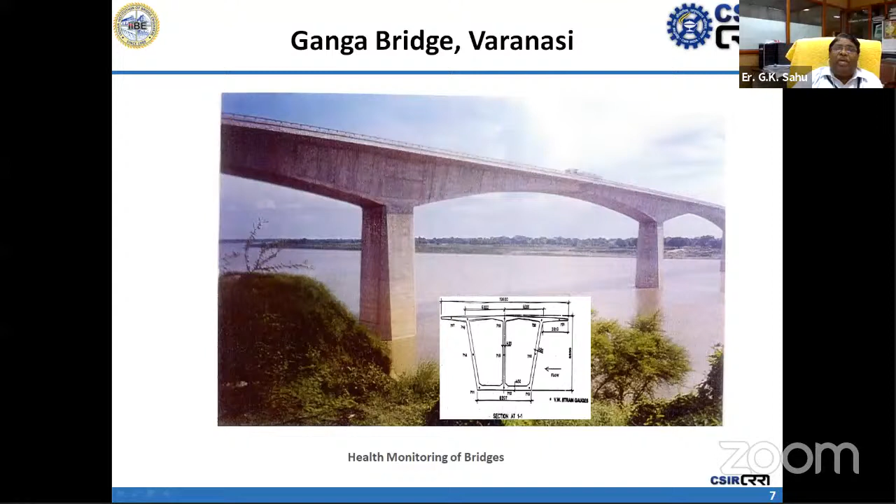Ganga Bridge, Varanasi is a 4-lane bridge, twin cell box girder, cantilever type, 65 meters on both sides. The instrumentation has been done in the well foundation, pier, and both arms of the superstructure—cantilever 65-meter arm, around 27-meter high pier, and 65-meter deep well. Outer diameter of the well is 13.5 meters.

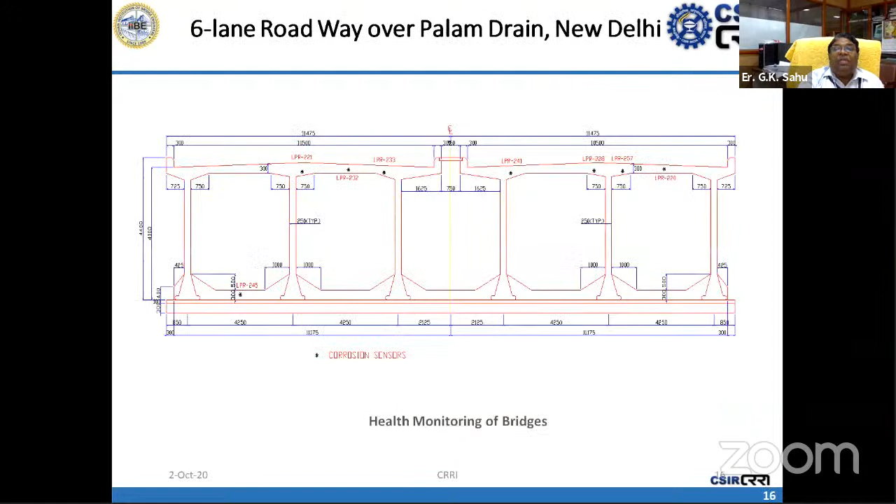Then the Jwari Bridge—instrumentation was done there to see the efficacy of the external pre-stressing work. Then this Palam drain, 6-lane bridge, was also instrumented. Then Signature Bridge, New Delhi.

Yes, there is instrumentation on Naini Bridge, Allahabad, also instrumented. Then Chambal, Kota Bridge across the Chambal—there is also instrumentation work like that.

And these are the new bridges which will be instrumented within a year's time—that work will start. Actually, the Signature Bridge between Okha and Beyt Dwarka in Gujarat—all are cable-stayed bridges.

And this MG Setu bridge—there is a new bridge coming in Patna, parallel to that MG Setu, across the Ganga. Then at Allahabad, the Phaphamau bridge. Then in the Jharkhand-Bihar border, the Sahibganj to Manihari link, there is a Ganga crossing there—so that will be instrumented.

So within a year, you will find that these bridges will be instrumented. It will take 3 to 4 years due to construction activities. But a good initiative has been taken by the National Highway Authority of India and the Ministry of Road Transport and Highways—they are going to instrument all the big bridges.

They have put these 4 at present, but later on they are going to put all the major bridges. Some good views of our bridges in India. Earlier we were thinking we are not having good bridges in India, but now you can see many bridges. Bandra-Worli Sea Link, Vidyasagar Setu Hooghly, Atal Setu, Jammu and Kashmir. So all these bridges we are having.

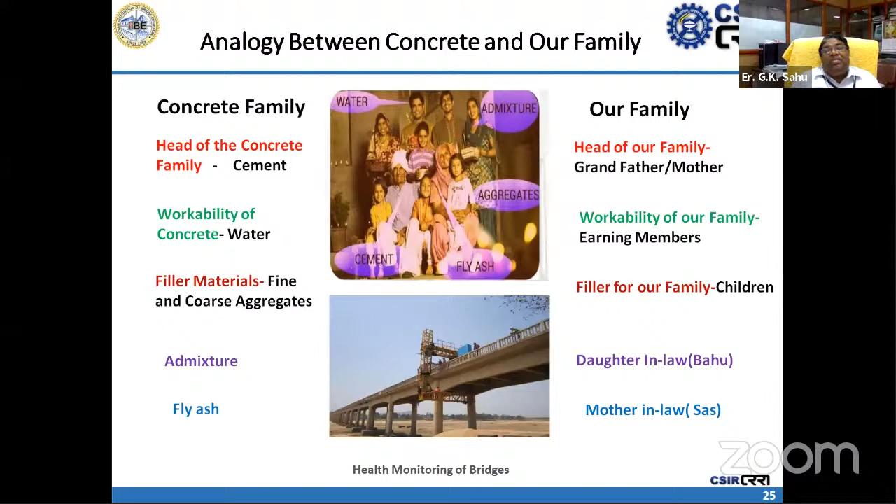Reinforcement you can compare with bones, and in pre-stress structure you are having the same thing what our bone is doing for our structure, just maintaining our shape. Same thing in case of pre-stressing, this reinforcement is doing. So you can find very much similarity.

Even structure number, you can compare with the name of a person, a unique name. Design and drawings, yes, as in our body, you can compare RNA, DNA. That is the design and drawing.

So I will request all the engineers connected with this webinar, please keep all the design and drawing preserved. Make soft copies, dump into the computer, and really preserve this, because our future generation will use it whenever they want for repair or rehabilitation. For the last 30 or 40 years back, we are not having any record, and that is creating too much problem while we are going for rehabilitation work.

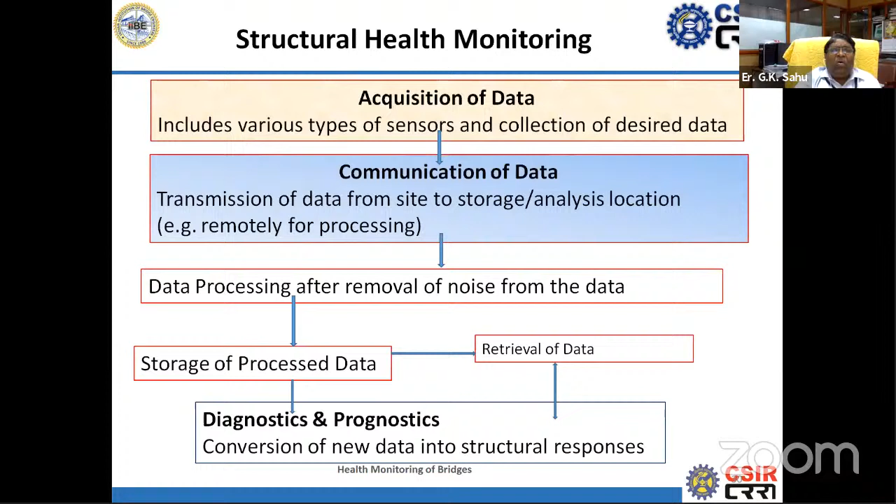And these are the six principles which one should remember for any project. GM1, good management: there should be a very good manager to manage the project. Good materials: whatever materials we are using, that should be the perfect one. Good mix design: whenever you are changing your source material, anything - sand, coarse aggregate, cement, any steel - anything you are going to change, then you have to see your mix design also.

Good manpower: in every stage we require it, whether it is the RMC plant, the construction site, the design side, or the client side. Good manufacturing technique to expedite the work: we have to use the latest technique and whatever the advantages. Sometimes we have to see some techniques which will give us less time and less construction cost.

GM6 is good maintenance. This is very important, the sixth one, which we civil engineers are neglecting. We think that once a structure is constructed, it will last 100 years without any maintenance. That guarantee we are taking, but it is really very bad. If you are not going for GM6, your structure will collapse within 20 to 30 years, not 100 years. So that we should really consider.

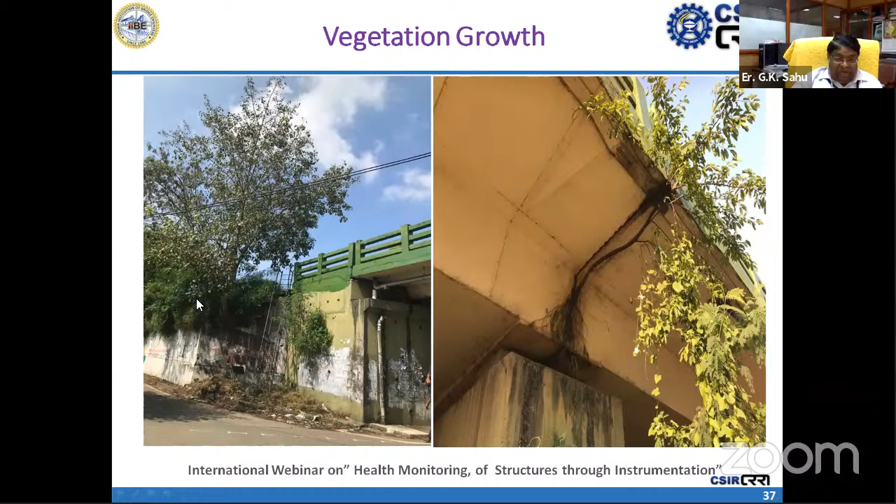You can see here, we don't bother. Once we construct this structure, then we don't want to try anything to clear or maintain these structures. So you will find after some time this retaining wall will collapse. Very small thing, drainage spouts are missing, and it leads to this type of cracks. Not only at the pier head, you find it here also. So these things we should avoid.

Drainage spout. Waterproofing of structure is a must. I will say there should be no interaction of water and structure. That is the main thing. If you want your structure to last 100 years, there should be no interaction between water and structure. So you have to apply whatever is required. This is shown like this.

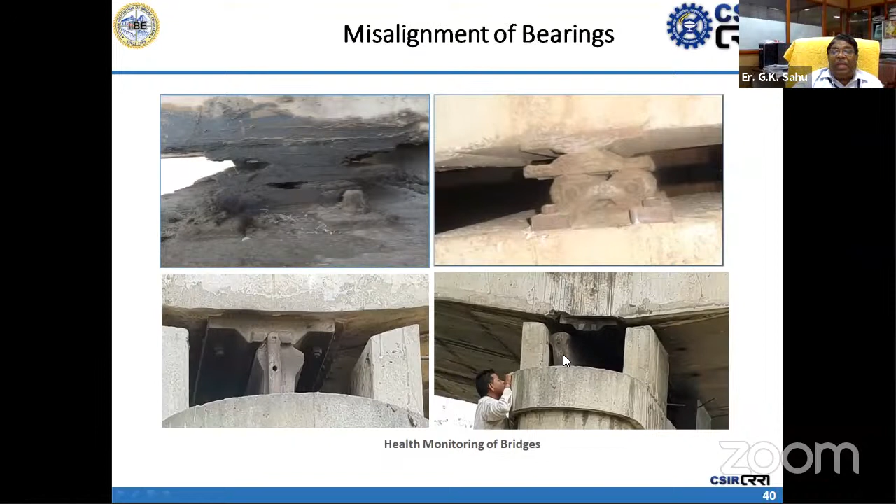You see our maintenance, how we are maintaining our bearings. We don't bother at this stage also. The next year it will be like that. So if this is the case, how can we expect our structure will work? You see here, it is fully cracked, that bearing pedestal, but nobody bothers. Nobody wants to go downstairs and see that also. You see what is the effect of this?

Then you have to replace it. There is no other option, and this is a very big operation, just like our knee joint. That's why I am comparing this bearing with the knee joint. You see, with that manpower, there is failure within 1 to 2 years.

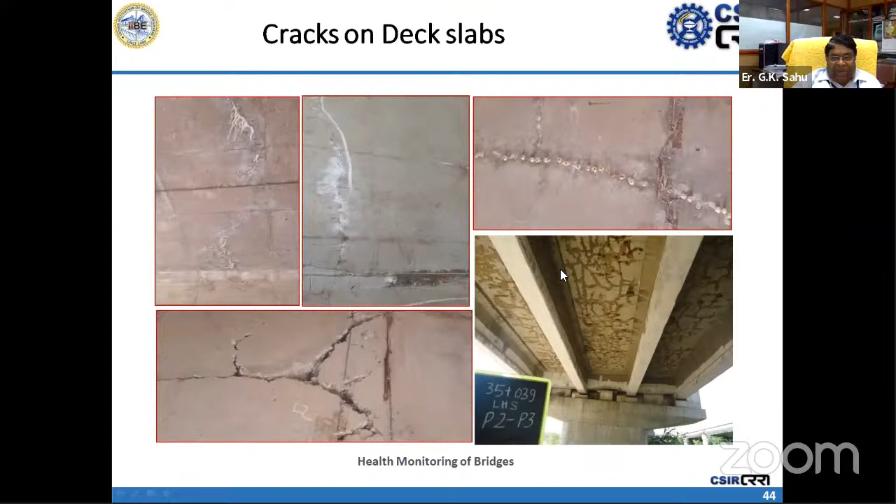When we are neglecting compaction and curing during construction, the material won't be proper, and you will find this type of problem. Then you have to do very big repairing work. So it is better that during construction you take care.

For inspection you need a mobile bridge inspection unit. That is a big one, but very essential, so that we can see everything below the structure. Yes, there is drone technique, but that is in developing stage. We will definitely use it later on in a bigger way. But at present, at least every state should have this, at least 5 to 6 units.

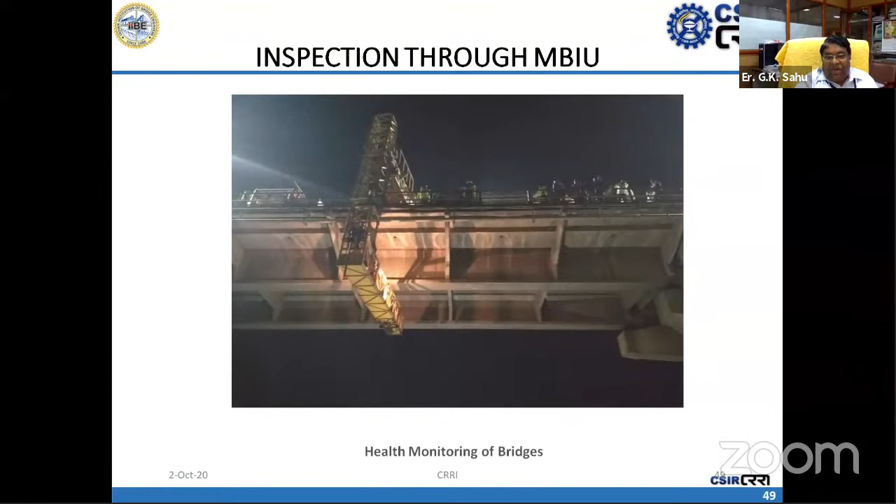Then there should be a walkway actually. If you are not having a mobile bridge inspection unit, we should insist on a walkway, because this is a very good way to inspect any bridge. You can see inspection through mobile bridge inspection. You can go to any part, girder, bearings, and you can see. Also at night, because if you are monitoring in a city area, we have to monitor from 10 p.m. to 6 a.m. So that is the time. Throughout the country, if you are doing this, you have to be ready for night work also in case it's needed.

Sometimes in situ construction is very difficult and time consuming, so you can go for composite construction.

This pier cap, you can see in one go we are casting around 10 to 12 meters. This height is around 25 meters, and in only two lifts we are casting. Then segment construction, this is essential actually, and you can see this type of work.

You can see this design. Design people have to take care of handling stresses. Sometimes I am finding in several bridges there is so much cracking during erection, because people are designing for the design load but not for the erection load. So this should be taken care of by the designer.

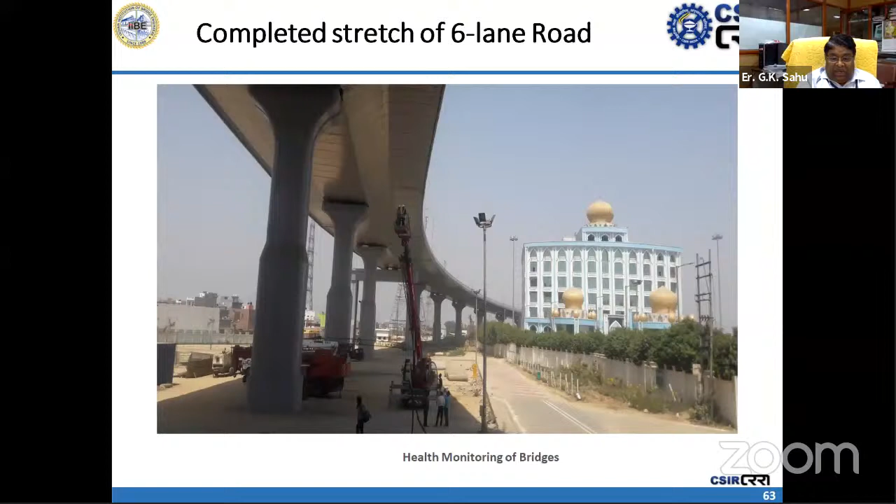Sometimes we are lifting the whole girder, sometimes just lifting one segment of the superstructure, but sometimes we are lifting the whole superstructure, the whole girder at a time. So that lifting stress should be taken care of during design.

We all know these techniques, the segmental technique. If you are not careful during construction and maintenance, then you have to go for external pre-stressing. You will see afterwards how many.

If you are not monitoring, someday this bridge will collapse definitely. This is not a one day work. Actually, if you see, it will start like this, and if you don't care for 3-4 years, it will go like this. So proper inspection and monitoring is essential.

You can avoid this collapse of bridges by putting some sensors, by knowing the health status of the structure. You see, this is only due to negligence. We are not inspecting the bridges, not monitoring the bridges. You can see so many collapses.

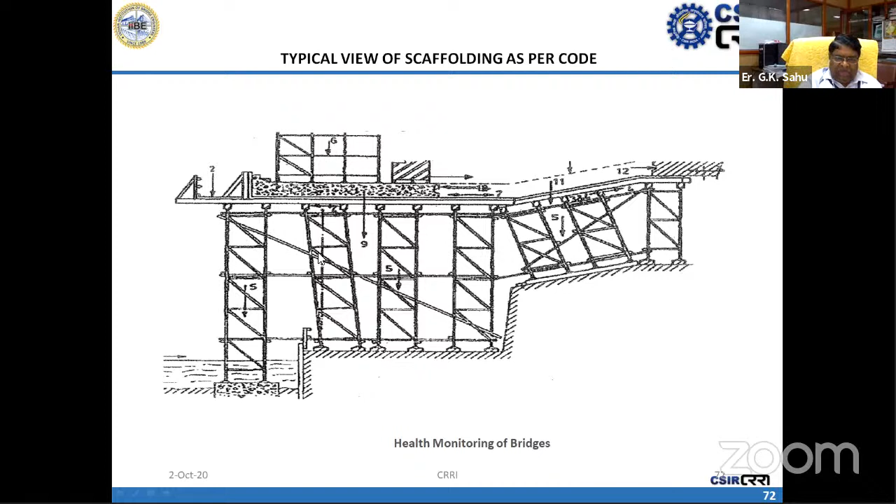Simple thing, this scaffolding work, we have to provide some diagonal members also. Generally in scaffolding you will find horizontal and vertical members, but diagonal is also essential, and sometimes it is getting collapsed during construction. So to avoid all these types of things, we have to monitor the health status of structures.

These are the 8 parameters which we can monitor very easily: stress, temperature, deflection, lateral pressure, tilt, crack width, corrosion, and acceleration. By monitoring these parameters, you can comment about the health status of structures.

These parameters are common to all structures. You can monitor a bridge, you can monitor a building, you can monitor a nuclear power structure, you can monitor a dam. So if we are talking today about bridges, it will be applicable to all structures.

But for choosing any type of sensor, we have to see all these 4 parameters. Suitability for embedding: some sensors should be embedded because exposed sensors are sometimes difficult to protect. So it is better once you put them during concreting, then it is preserved. Just like in a locker you keep your ornaments, so a sensor embedded in concrete is like it's gone into the bank locker.

Ruggedness for on-site handling and installation: you have to see how we are going to use it. If you are experimenting in the lab, you will need a different type of sensor. If you are using it at the site, bridge sites or any structure site, you have to use a different type of sensor. Long-term stability: our structure is for 100 years, so we have to see that it should have very long stability for 100 years.

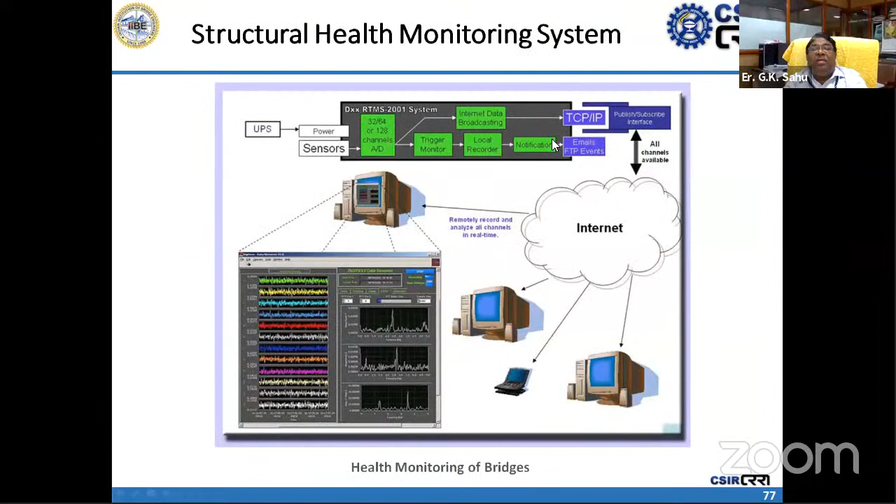To find out temperature across the thickness, you have to put several sensors so that at different depths you can find out the gradient. We did this around 27 years back, in 1993, at the Ganga Bridge, Varanasi. The pier thickness was around 120 centimeters, so we wanted to know the temperature gradient across this thickness. We put sensors there. For any thickness, you can put some sensors and find out what is the temperature gradient.

Then for deflection, you can go for any instrument - simple dumpy level, LVDT, or 3D terrestrial laser scanner - anything you can use, but we have to know the deflection. That is the very predominant parameter.

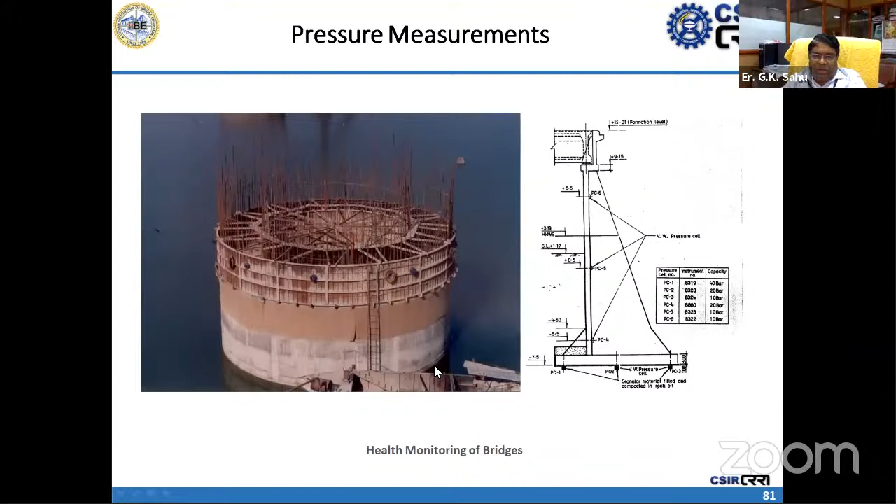Then lateral pressure, we can monitor through earth pressure cells. In case of retaining wall or well foundation, we can monitor these things. We can put the pressure cells at different levels and find out.

These are tilt meters, through which we can find out the tilt. Nowadays, we can automatically monitor by putting some tilt sensors there, and you can monitor remotely.

Inclinometer during construction - if you want to monitor, say, the tilt of the well during sinking operation, you can find out through this inclinometer sensor. You just have to insert this sensor in this case.

If you want to monitor cracks, you can go for manual monitoring with a microscope, or you can put some crack gauges and monitor automatically.

This is a corrosion sensor during construction. You can put some corrosion sensor and find out the rate of corrosion. Rate of corrosion means change in effective diameter per year. You can find out the unit, which is change in effective diameter of the bar per year, because it's a very slow phenomenon.

You can monitor anything with the help of our mobile bridge inspection unit. You can go to any part, take samples, and check. So that is there.

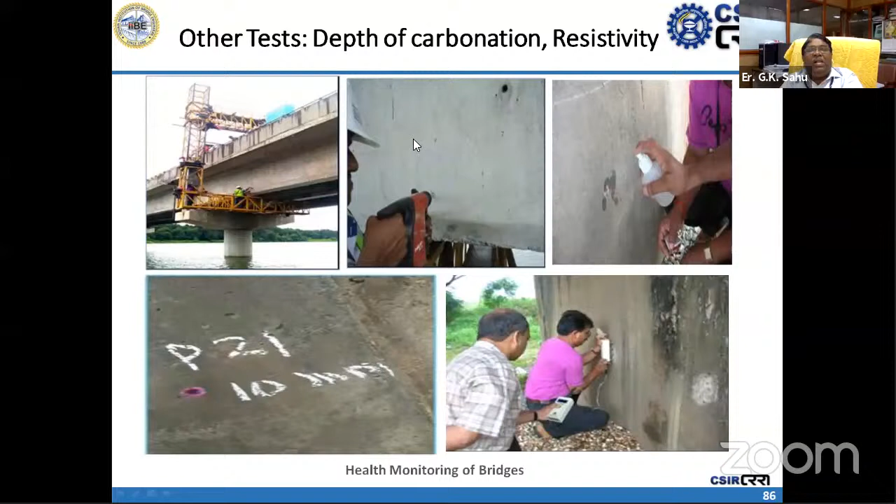In case of accelerometers, you will find so many types. We started with this much size, and now we are using this type of very small sensor. Earlier, this was a uniaxial accelerometer, and nowadays you can find this much size only for triaxial sensors.

If you want to monitor pre-stressing force, you can go for load cells. This can be put between the end bearing plate and anchor plate, and we can see at any time what is the pre-stressing force. So for instrumentation of a bridge, you have to choose some instrumentation scheme, and these are the parameters which we can monitor.

In case of well foundation, we can see at different levels. We can monitor these parameters: lateral soil pressure, hoop and longitudinal stress, tilt of well, corrosion. And these are the monitoring stages.

We have to take readings. Before putting any sensors, you have to check whether your sensor is working properly or not - that is the first performance evaluation of sensor. At least 2 to 5% of sensors should be checked, during hardening of concrete, during pre-stressing, after completion of construction, during global responses, during peak summer, peak winter, effect of live load, and long-term. These are the stages.

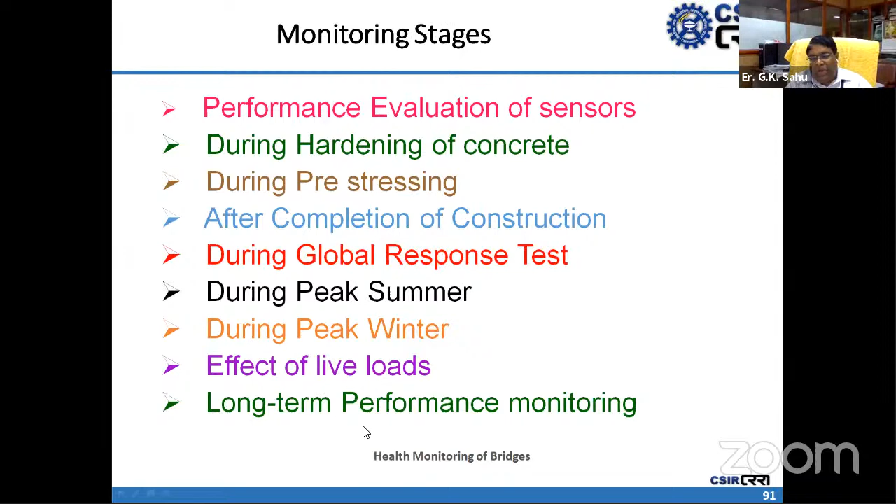You can check your sensor by putting a strain gauge here and applying manual strain, just rotating this arm and putting this movement. The displacement we will find out, so delta L by L will give the applied strain.

You can compare by seeing your output of the sensor. You can also put some strain gauges inside cylinders and find out what is the strain output of that gauge versus the surface strain, or use a strain control machine directly.

Temperature is very easy - you have to put it in a temperature bath with some standard temperature sensor, and you can compare. For pressure cells also, we have to put that pressure cell inside a chamber and keep changing the pressure of the fluid, and you can compare.

So these are the very minor tests that are required before putting any sensor on the structure, so that we can get that confidence whether my sensor is working properly or not, and how much is this confidence level.

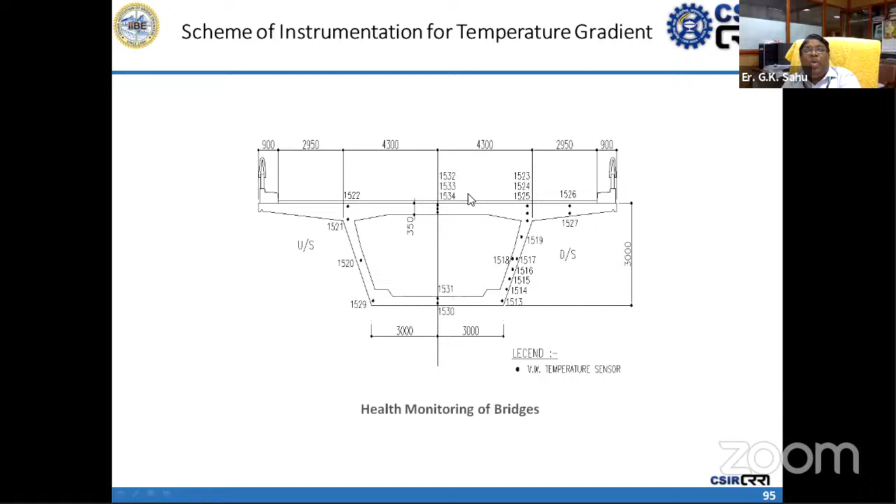For temperature monitoring, just for a box girder construction, I have shown so many sensors you can put, and you can monitor any temperature gradient in any components - in slab, web, or deck slab, or junction, anywhere. This is the deck slab temperature graph during summer. We have put some sensors in the deck slab at different depths, and this is the daily variation of how temperature varies at the deck slab.

This is how the strain varies due to diurnal temperature variation in peak summer. So this is the variation - you can see how if something happens, this behavior changes. Same sensor 14, 17 - these are sensors at the junction of the web and deck.

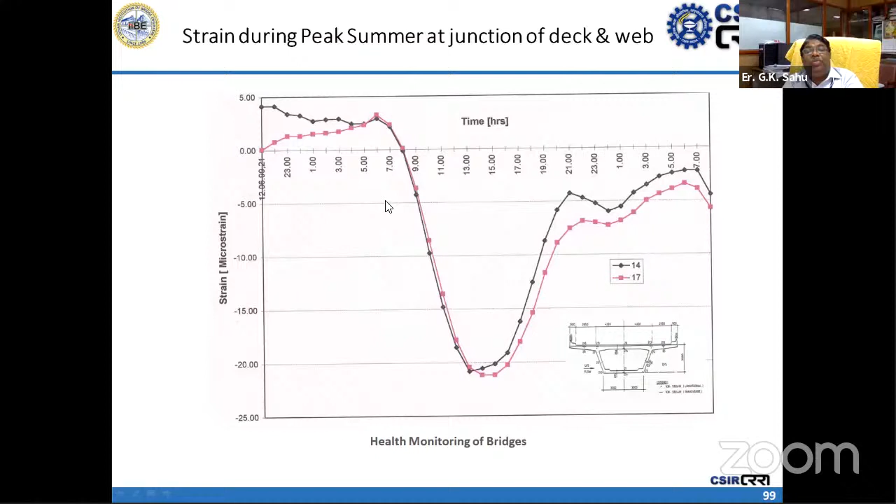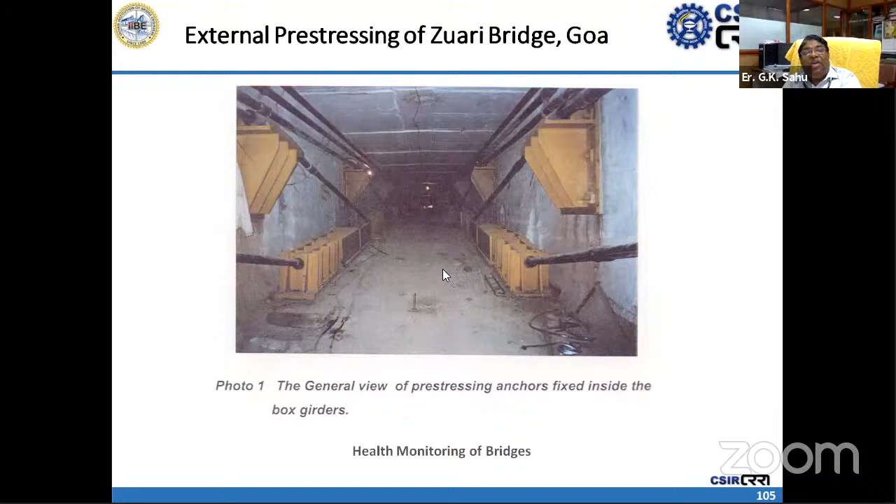We have monitored strain as well as deflection, and for deflection you will find only that net effect is 5 to 7 millimeter. So we can't expect a very big deformation change due to external pre-stressing - only that stress level will change, but deformation you can't see much.

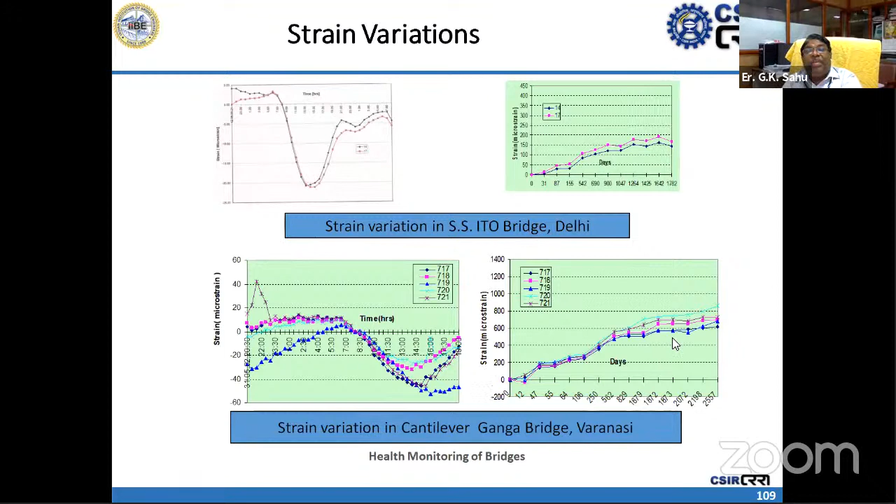If you can't put any sensor, let us take one deflection measurement at the middle point, or for simply supported or cantilever at the end, and record the minimum elevation and the maximum elevation over 2-3 years. Then give the upper limit and lower limit for that bridge, take one set of measurement, and see after 20 years whether that level is same or different. If it is within that limit, there is no degradation in the structure.

Degradation will only come when you allow water, air, carbon dioxide, etc. to enter. You have to prevent these things, so you can keep your structure well.

For strain variation also we have to see what is the minimum and maximum, and that reading should come within that limit. Say if one gauge out of 100 is working, then also you can comment, because at the beginning you have that record of what is the minimum and maximum variation of a particular gauge. In any year you can find out this variation, having all the effect of whatever seasonal variation, the daily variation, considering all those things this has been put.

So taking any one set of measurement, you can comment about the health status of the structure. So that is the beauty.

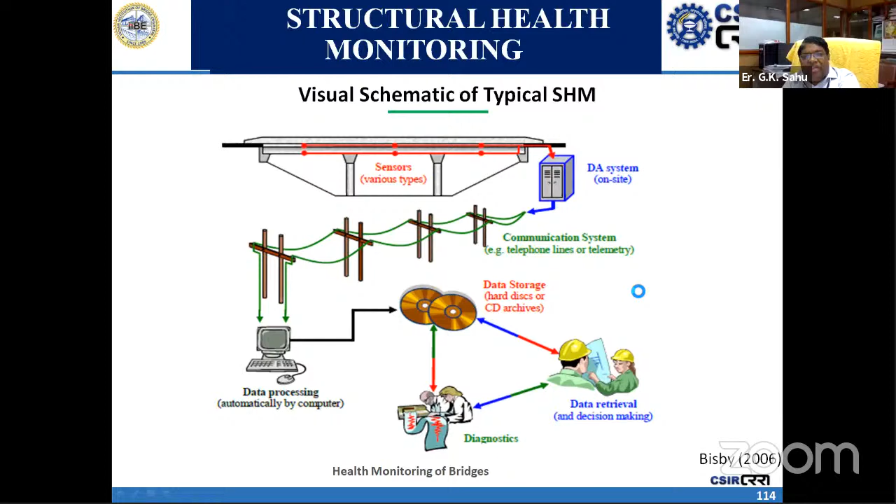I will request all of you, all the bridge authorities, to kindly put some sensors in the bridges, so that later on we can say something about the health status of the structure.

As far as CRRI is concerned, we have that mobile bridge inspection unit. We are having bearing test facilities, so we can monitor condition assessment of any structure, say bridge, flyover, anything. Then you can go for the quality assurance also. So these are our activities which we are monitoring there.

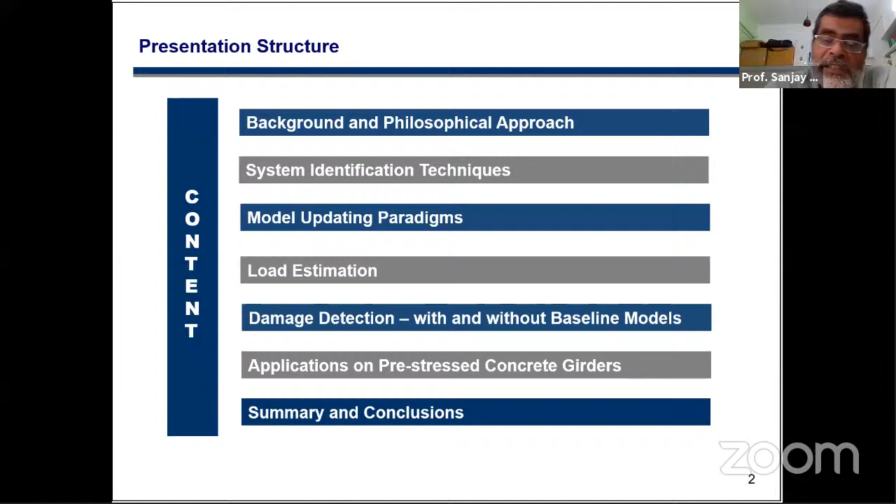So there are several important bridges in the railway infrastructure, most of which are over 50 years old, and several are more than a century old, but they're still running.

And not only are they running, but the loads being run on them right now are tremendously more than what they were designed for at the time, both in the frequency of trains and individual axle loads. Railway had gone from CC to CC plus 6, to CC plus 8, to CC plus 8 plus 2, and now they're talking about 25 tons and HML. And the axle load has gone up from 20 tons to 32 tons, which is huge.

If you're looking at a bridge which was designed for a 20-ton axle load, and now we are saying we are running 32-ton trains on it, that's a massive, massive change.

And the bridges in Indian Railway typically perform well because a lot of the older bridges were made with a very, very conservative approach of design. I think that's one thing we take back from all our assessment of bridges: having conservative design approaches, while maybe uneconomical in the short run, ends up giving you structures which last a long time, because your load patterns change, your requirements from them change, and having a conservative approach gives you a certain way of dealing with change over a period of time.

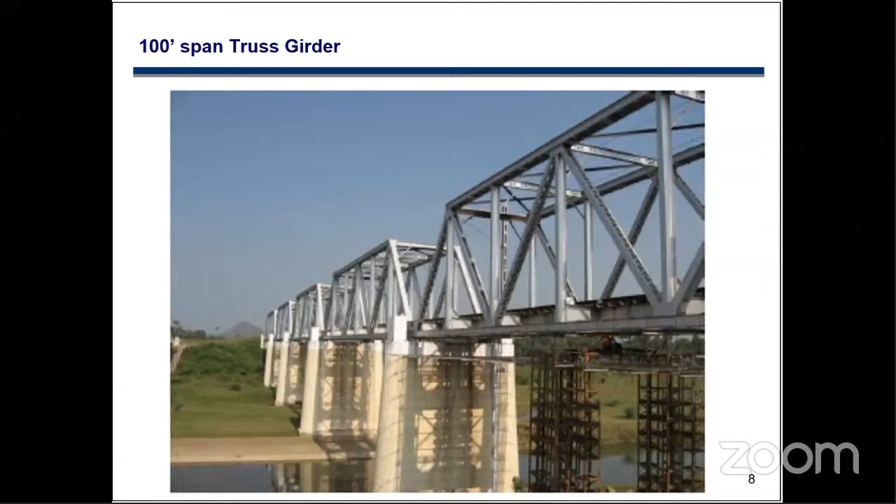So this is one of the first bridges that we had taken up. It's a 100-foot span truss girder. Railways follows a very nice principle of having a single design which is replicated through several bridges. So this 100-foot span girder was a typical RDSO design, which we had come across in at least about 4 or 5 different types of bridges at different places, where the design was the same, which also helped us try to figure out whether the same designs behave in the same way in different places.

So we came up with an instrumentation scheme. It's a fairly straightforward instrumentation scheme where most of the critical truss members we monitored. The upstream girder we monitored using both top and bottom strain gauges so that you could get an averaging of that as the axial strain and the difference in that as the bending strain. And the other girder we monitored with only axial strain gauges.

This is also one thing, because instrumentation is an expensive process and there has to be a certain optimization of instrumentation which needs to be done. We also had displacement gauges, we had accelerometers, we had thermocouples to measure the temperature, we had tilt meters. So we had done the whole thing.

So as far as strain gauges were concerned, we had got the 5mm strain gauges for steel, the longer 120mm strain gauges for concrete, which we use for measuring both concrete and masonry. So that was the kind of instrumentation scheme that we had actually done.

We had got the LVDTs to measure the displacements, and we had placed LVDTs at the center of the span, and we had placed LVDTs on the roller side to try and get an inference on what is the fixity at the roller bearing or whether it is completely free.

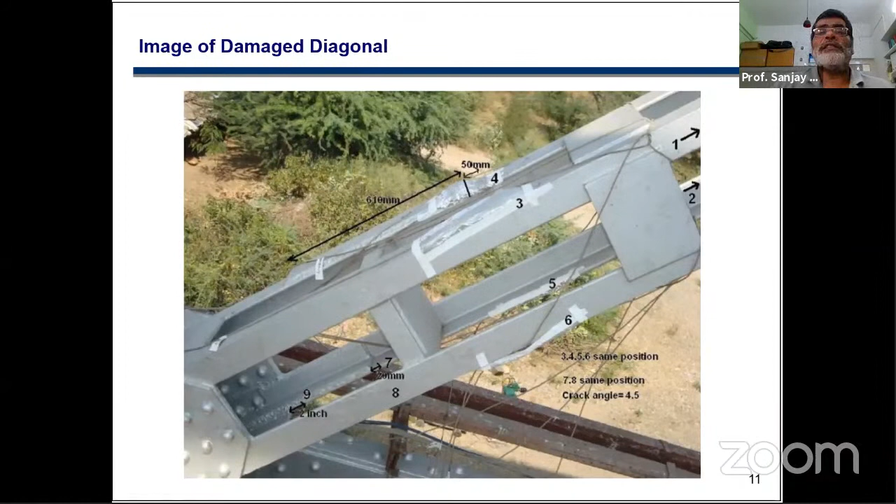Another bridge that we had managed was a 150-foot span damaged truss girder, where there was a diagonal which was damaged. In addition to the instrumentation scheme that we had done for the 100-foot truss girder, we had also done a far more detailed and intensive instrumentation using strain gauges alone for the damaged portion, where we tried to look at the damaged portion and have several gauges which give you a pattern of strain around the damaged portion.

We had a similar instrumentation scheme for this. Then we had done a masonry arch, which was a beautiful structure. It is, I think, a 140-year-old masonry arch, which is in Jharkhand. We had monitored this with an instrumentation scheme of strains and displacements. And we had done some kind of rail level monitoring to figure out what is the dynamic impact coming on the structure and what are the longitudinal forces being transferred. Those are the other parameters that we're trying to monitor.

System identification techniques, we had several standard methods which we had used. One thing we found out is that global frequencies are insensitive to damage, which is essentially a local phenomena. And although the global frequencies are the easiest to measure, they don't change much, whether we looked at a damaged girder or an undamaged girder. We had done this in the lab also, where we had created a structure where we had physically introduced damage. And we had seen that the global frequencies don't change much.

Putting a local damage does not really change the global frequencies much. And that is very interesting, because somewhere along the entire thing, there was this expectation that vibration-based monitoring would show shifts in global frequencies which would tell you what the damage is. And now this is very interesting.

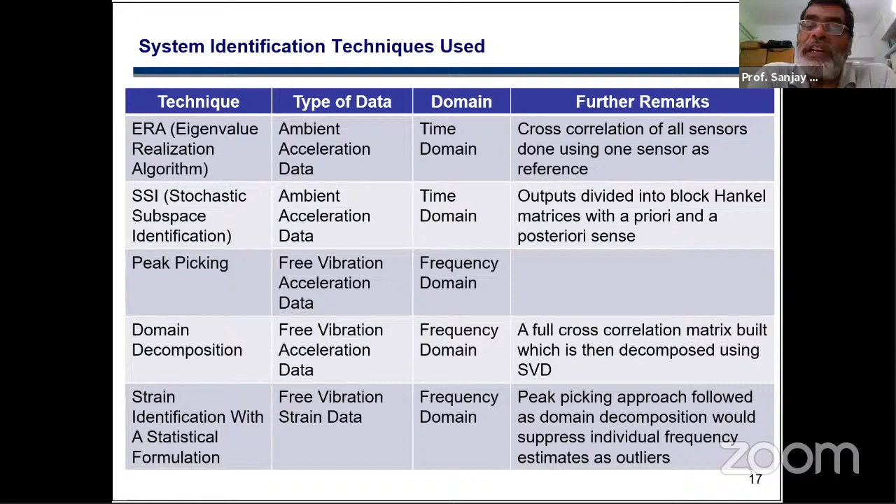Also, we did several system identification techniques: eigenvalue realization, stochastic subspace, peak picking, frequency domain decomposition, and a strain identification with a statistical formulation. These involve different types of data, whether ambient acceleration, free vibration, or strain data, and different domains - some are frequency domain techniques, some are time domain techniques. We did all of that put together.

So then we ended up doing a local thing, where we tried to figure out what were the strain decompositions from the local data, and from there we picked up different kinds of things. Then you look at where does it occur - does it occur in both girders? Does it occur in only one girder? Does it occur in one and not the other? Those kinds of patterns, along with the data, ended up giving you a damage indication.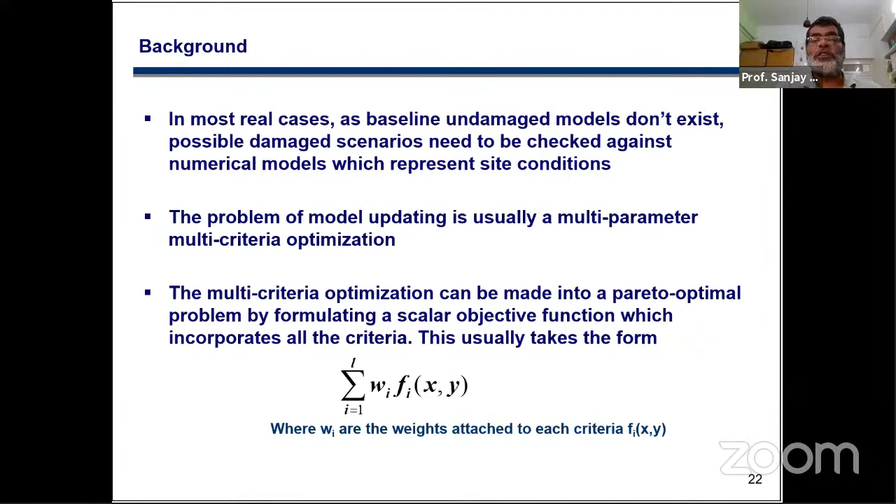Model detection, in most real cases, as baseline undamaged models don't exist. Damaged scenarios need to be checked against numerical models, and then you end up getting some kind of a multi-criteria optimization. This is a kind of weighted formula for trying to figure out what is a scalar objective function that incorporates all the criteria together. Because we can incorporate all the criteria together, it changes the multi-parameter, multi-criteria optimization into something in which a Pareto optimal solution can be generated.

Issues with the classical techniques is that most optimization techniques work with local minima, which is a black box. We have just talked about this. I'm just repeating a lot in this particular slide.

So the approach that we came up with was that we did a two-pass system. First we did a pass to check the data for consistency, and we had a numerical model which is at least qualitatively representing field data. It might not represent it quantitatively, but it has to qualitatively represent field data for the numerical model to be used for doing any kind of optimization.

The multi-criteria are generally taken to be the squared errors, to formulate a modified least square approach. Based upon the degree to which a numerical model represents the field, we generated shape norms, and these shape norms, along with the weights, generated what was a Pareto optimal single criteria approach.

Then we did a data pass algorithm, where multiple runs are recorded, consistency checks are performed to identify shape and peak correlations. From the various data sets, the best correlated ones are identified for use in model updating exercises.

So the model pass algorithm is that you take an n-dimensional solution space and a start point is taken. Then you do a sensitivity analysis based upon varying parameters. Based upon the level of sensitivity, we picked the two most sensitive parameters and varied them till we got one solution. Then we picked one parameter out and took that with the next parameter, and again did a two-pass system.

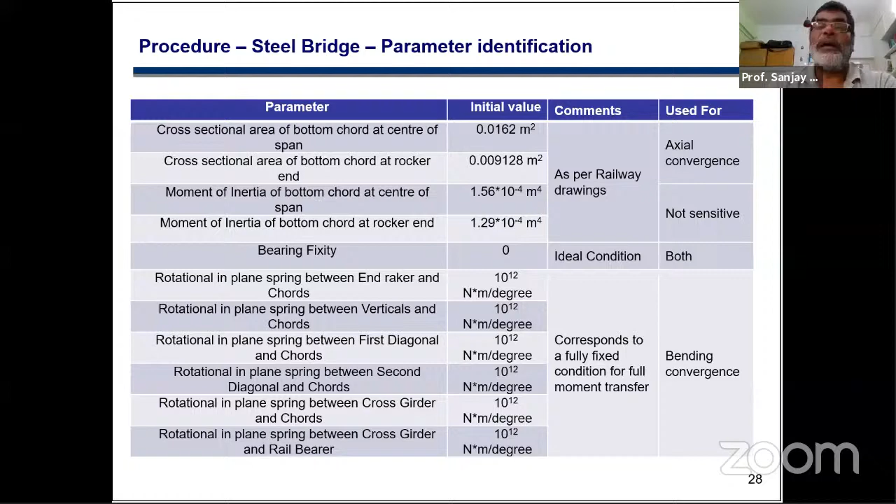This indicates that your bridge is actually in quite a good condition, because there isn't much change really that you're getting if you're looking at it from this kind of perspective. This gives us a way of looking at a bridge which shows that the condition of the bridge is okay.

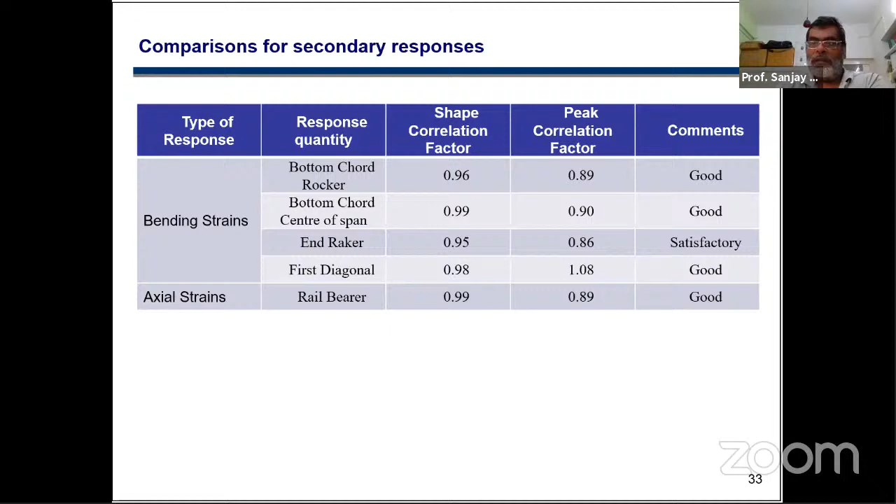Masonry arch, we followed the same approach. You took these as your parameter choices and ranges, and you ended up getting correlation factors of this form between the different responses and your numerical responses, between your site recorded data and numerical responses.

You did your sensitivity analysis, and ended up getting final values starting at your relative minima. You ended up getting an error norm of 0.07, which is a 7% error norm between your site data and your numerical model, and you got a certain value of your parameters.

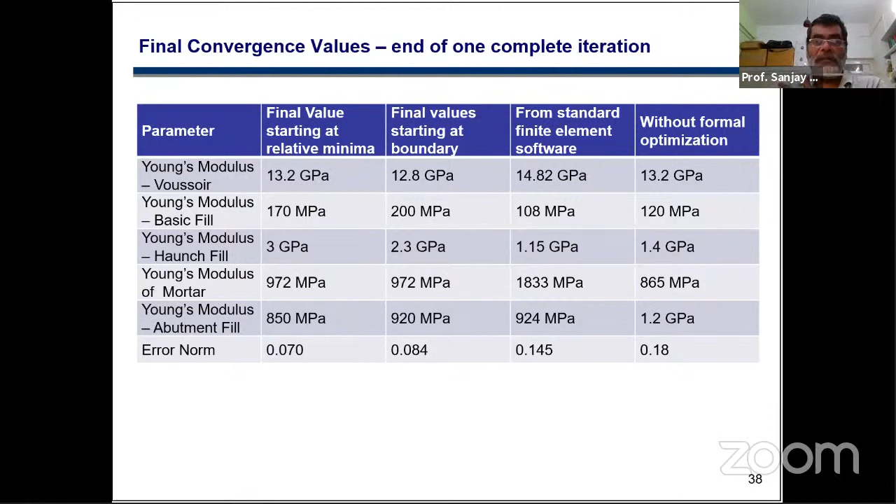The values of these parameters corresponded again to a system which indicates a sound kind of way of existence. And therefore, this assessment showed that your masonry arch was in a very good condition.

In summary, the proposed methods give excellent convergence results for a variety of structures. When problems can be partitioned, they reduce complexity. The approach is seen to outperform the standard solution, and the modeling ideology of the masonry arch coupled with the model updating algorithm enables convergence with strain measurements, which is unique.

So that was the entire model updating paradigm that we are looking at. Now, this is the way that we have actually approached condition assessment. And I think I've reached about the half an hour limit of this talk, so I'm going to stop now and ask whether there are any questions. There's more work that we have done, but I just wanted to give a flavor of the kind of work we have done.

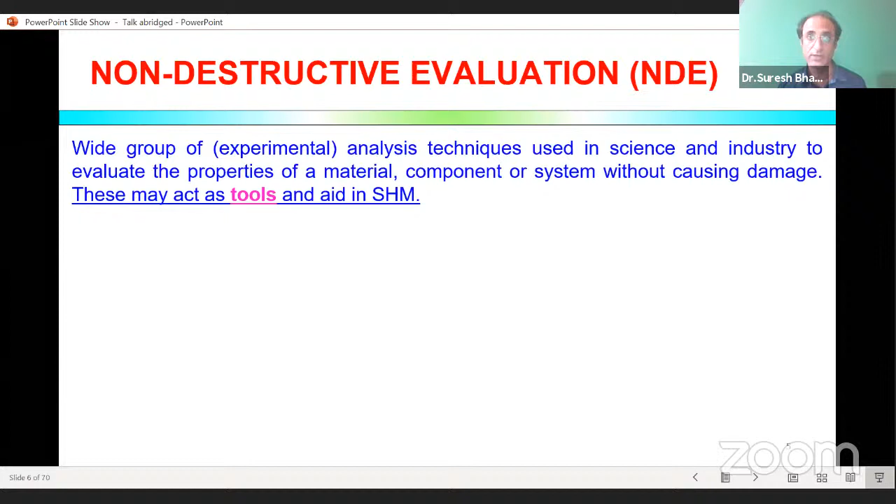We must distinguish the term structural health monitoring from non-destructive evaluation. Non-destructive evaluation is basically a set of techniques which enable measurement of some physical property of a material without actually causing any damage. So NDE techniques themselves are not structural health monitoring unless we use them for SHM in a certain framework such that we get continuous monitoring data of the structure. Then we say that this non-destructive evaluation technique is contributing to structural health monitoring.

Let's do a quick overview of the current and futuristic technologies and some of the sensors. We can break down structural health monitoring techniques into global and local. Speakers have already covered examples of both. Global dynamic response techniques are there, global static response techniques are there, and in local, if we apply an NDE technique continuously in the framework of SHM, that is also fine. There are also specific local monitoring techniques like the electromechanical impedance technique, or EMI technique. We have to judiciously combine global techniques with local techniques because global parameters generally are not very sensitive to incipient damage.

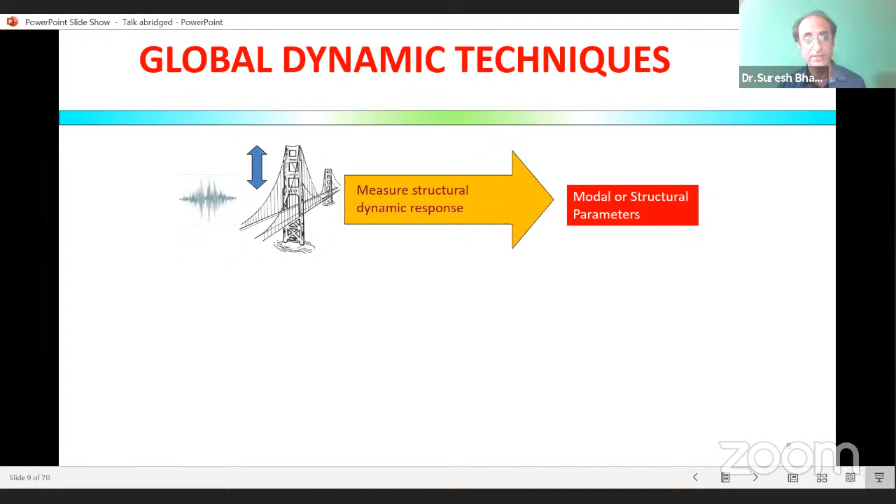As far as global techniques are concerned, we try to obtain modal or structural parameters by carrying out a dynamic test, or we begin with a finite element model, then do a dynamic test and model updating. Both versions exist, but essentially most techniques work in some way and look for parameters like change of stiffness, obtained from the acquired mode shapes and natural frequencies, or the change in flexibility, again from modal data, or change in curvature, which is the second derivative of the displacement. Whichever variation one is using, we are basically getting information about the modal parameters. Out of these methods, the damage index method, which utilizes the modal strain energy, has a definite edge.

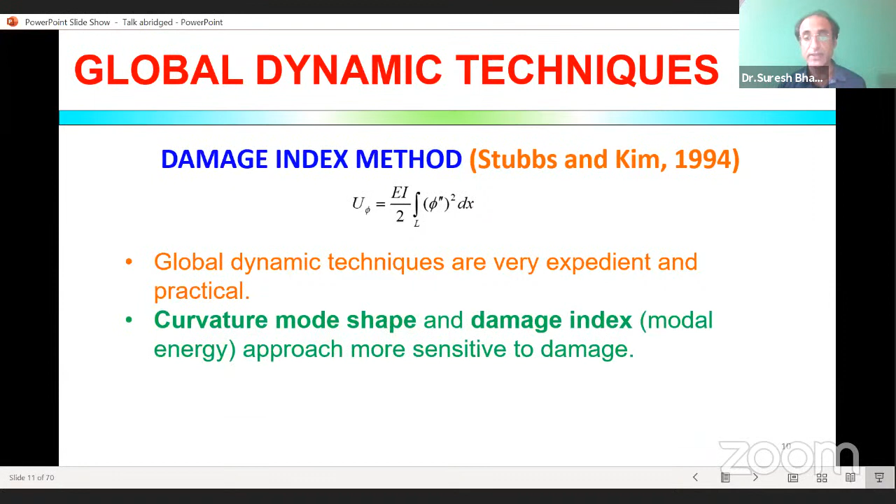So the summary is that global dynamic techniques are expedient and practical. Out of these, the curvature mode shape and the damage index method, which rely on modal energy, have higher sensitivity to damage. But these global techniques, especially the global dynamic techniques, rely on global modes, so they are sensitive to moderate to severe damage, but often miss the incipient damage. We'll see some examples of how this can be captured.

Now, global static techniques, theoretically, are fine, but practically infeasible because they involve applying calculated loads and measuring deflections or strains, which itself is difficult, especially if we have to measure a large number of deflections — that's a troublesome option. However, global static techniques can be used in identifying some operational parameters, like a particular key deflection or key strain at some critical locations. So we can definitely make use of them that way. But capturing damage and its location by standalone measurements could be a bit difficult.

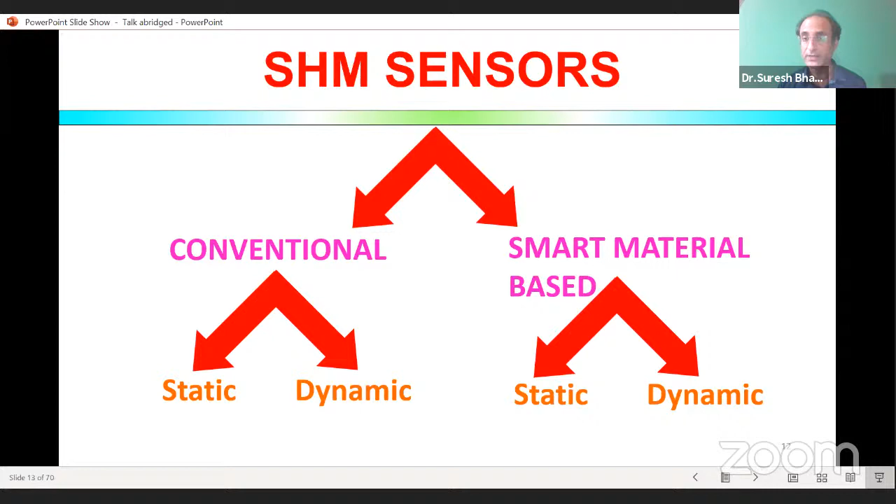When we talk about SHM sensors, we can classify them as conventional and the new-age, smart-material based. Conventional sensors have both static and dynamic types, and smart materials also have both static and dynamic sensors. Conventional sensors include electrical strain gauges and vibrating wire strain gauges. Electrical strain gauges are suitable for lab-based experiments, while vibrating wire strain gauges are suitable for field applications. They are quite versatile for long-term strain measurement in the field.

In the dynamic field, essentially accelerometers are most popular. But accelerometers also face problems of small bandwidth, being very expensive, and being fragile. So smart material based sensors offer new avenues to us. Basically, smart materials are specific materials which possess the property of undergoing a specific physical change when subjected to a stimulus — they display stimulus-response characteristics, and these are utilized to measure particular parameters. We have a number of commercial smart materials like optical fibers, shape memory alloys, ER fluids, and piezo materials.

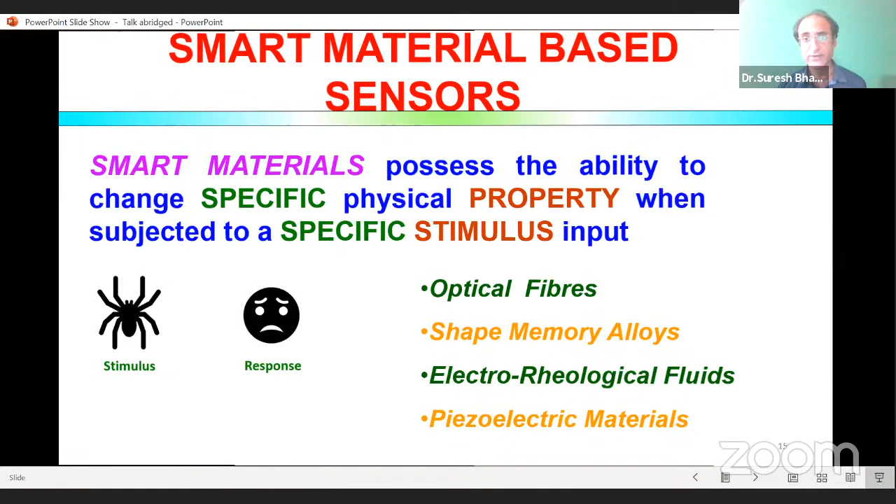So here we'll just briefly discuss optical fibers and piezo materials. Optical fibers now form the backbone of communication systems. They are preferred because they are free from electromagnetic interference as opposed to electrical cabling, and they use the process of total internal reflection for communication.

Now they have also entered the field of sensing in the form of fiber Bragg grating sensors, or FBG, which are quite versatile. Basically FBG is a set of gratings imprinted in a small segment of the fiber, and they can reflect a particular wavelength of light. If we pass a broadband light, majority of the signals are transmitted to the other end, and one particular wavelength called the Bragg wavelength is reflected back. This Bragg wavelength is sensitive to any strain, temperature, or pressure changes. That is the principle used by optical fiber sensors.

They are best for static measurements or low frequency measurements involving health monitoring applications, but they offer multiplexing. That is the leverage of optical fibers, that along a single fiber, n number of sensing units can be imprinted, and they can be monitored by just a single channel data logging system.

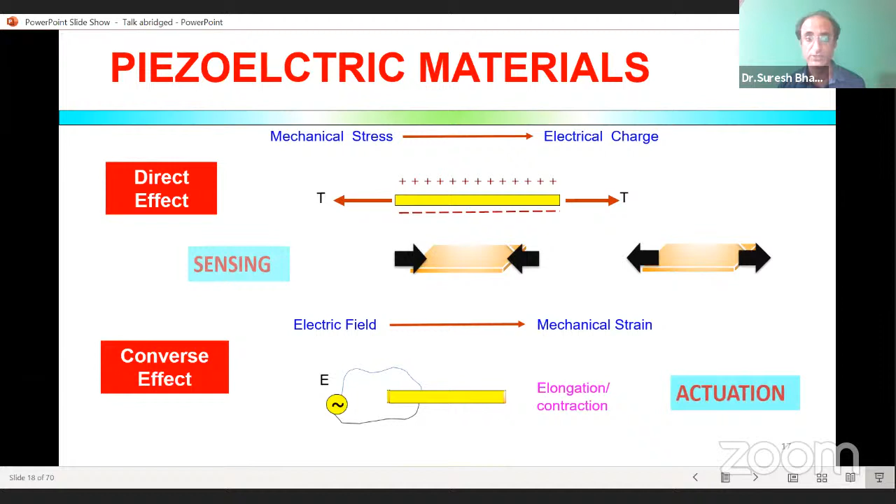I'm just halting up. A plane is flying very low, just a couple of seconds.

Now coming to the applications, we are using piezo materials day to day in our life, in igniters, detonators, accelerometers, tactile sensors, pressure transducers, in mobile phones. It's the piezo elements which convert sound signals into electrical signals. Structural health monitoring, energy harvesting.

So we'll discuss about energy harvesting also. In this configuration, the piezo element also acts like a generator. So it's a single unit generator, no moving part, so that way very compact.

The converse effect is utilized again in mobile phones. Now the converse effect is used for converting electrical pulses into sound in fuel injectors, musical cards, inkjet printers, vibration control, turbo machinery, actuators, precision positioning, and many applications which are numerous.

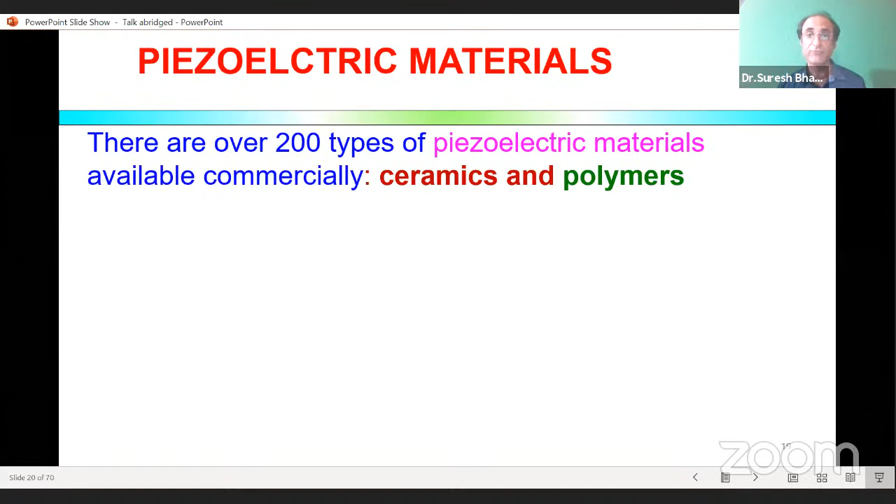Now there are over 200 types of piezo materials, and in the case of structural health monitoring, there is one typical ceramic and one typical polymer which is most widely used. Lead zirconate titanate is the most widely used ceramic in structural health monitoring. It has high stiffness, but at the same time it is brittle in nature.

Polyvinylidene fluoride, or PVDF, is a very popular polymer. It's ductile, so it's a good sensor, but it has less stiffness, and it also has the advantage that it can conform to any shape.

And then there are some special types of piezo materials also. The piezo materials by themselves have excellent signal to noise ratio as far as dynamic measurements are concerned. That's why they definitely have an edge over other sensors.

This is a very special type of piezo called macrofiber composite, or MFC. It can bend, and it's basically made up of piezo-based fibers, so it can affix to even curved surfaces also.

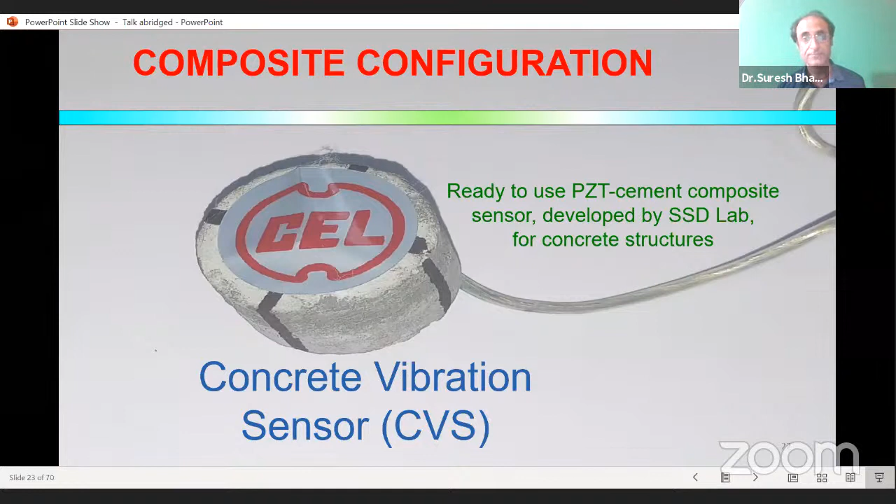Whereas the accelerometer is very expensive, the cost of the piezo-based sensors is very nominal. And the best part is that they are manufactured within India. A number of manufacturing companies produce these patches indigenously for various applications.

Now, when we say technology has a future, so when we call it future, then it should have some present.

So a technique or a sensor qualifies as futuristic, provided it has at least level 3 or level 4. Technology readiness level has variation from index 1 to 9. 1 means the system is just in the mind, or at the inception stage, and 9 means it's being applied in the field, with 2 to 8 in between.

So if something is there at the initial laboratory test stage, then we definitely know that in the coming years it's going to be a futuristic technique, a futuristic sensor system. In the case of piezo patches also, we have some operational techniques which are futuristic. Right now they are at the lab stage, and of course they have been applied in site conditions also.

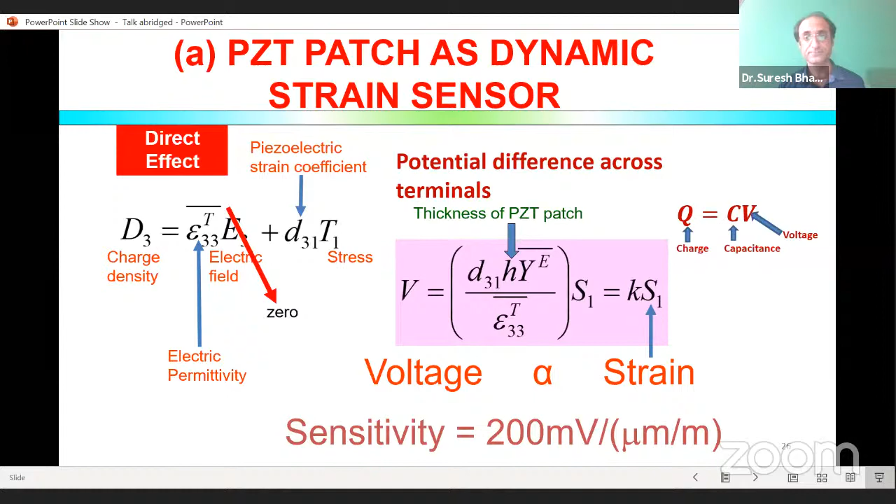We can use it in combination as a flexural sensor, if we bond the piezo sensors as a pair at the top and bottom of a flexurally vibrating member, and use an intelligent combination such that we get the voltages together, then this provides a measure of the curvature. Curvature is regarded as something related to the flexural rigidity.

Whereas in the traditional approach, accelerometers are used for experimental modal analysis. We can utilize either a shaker for lab experiments or a hammer for lab experiments. In the case of field experiments, we might use ambient vibration data in the operational modal approach.

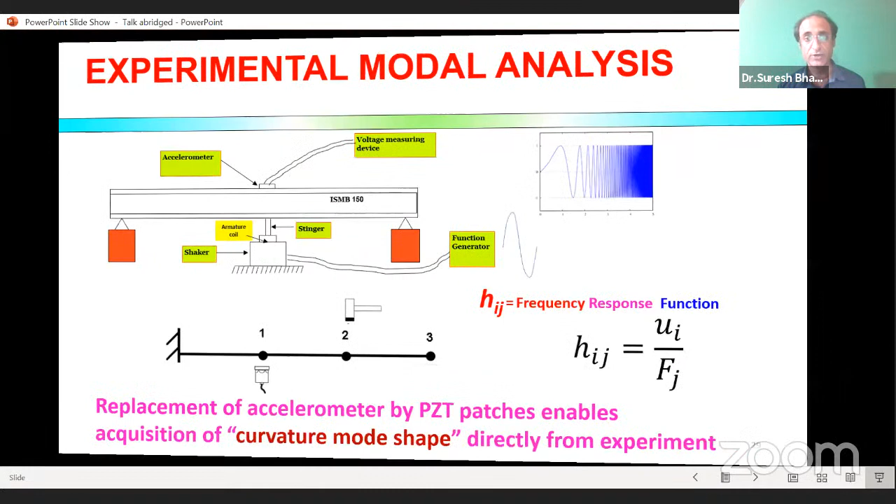Instead of utilizing accelerometers, we can use the piezo sensors directly in the way we have just shown, bonding at the top and bottom. So we obtain the curvature mode shapes directly. The advantage is that the curvature mode has higher sensitivity to damage, and they can very easily pinpoint the damage location.

The other application is the electromechanical impedance technique. This is also something going to be coming in a large scale in the near future. Here, basically, we first excite the piezo patch bonded to the structure by means of electrical excitation, and in the process, we measure the current flowing through the circuit.

The measurement provides us a value of the admittance, the ratio of the measured current to the voltage, and because there is a phase difference, we get real and imaginary components, the conductance and the susceptance. So the piezo sensor, though we call it a damage sensor, in actuality works both as sensor and actuator simultaneously.

The technique originally was developed for aerospace structures. Now it is finding applications in civil engineering structures also. Here, typically we use a sweep signal, and by this sweep signal, we get measurements at multiple frequencies so that it forms a sort of signature.

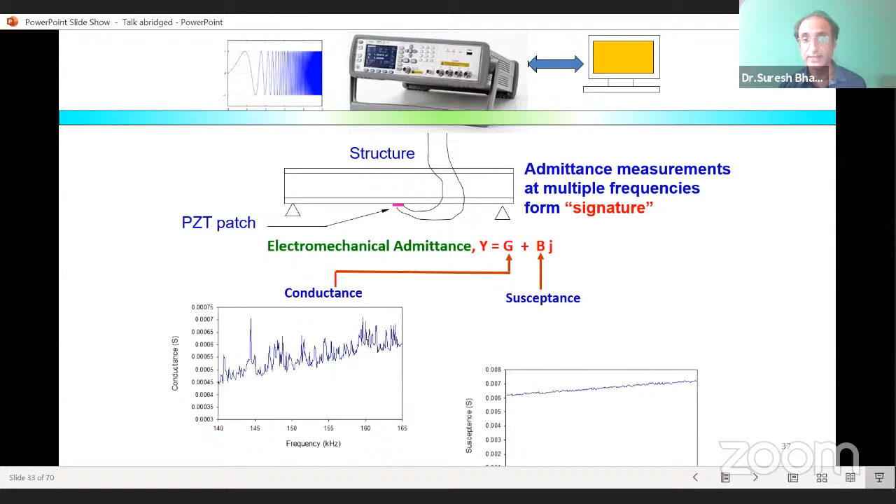So what is a signature? It's just like a thumb impression directly in the frequency domain, like a fingerprint. As long as the structure does not have any damage, the signature will have constancy, it will not change. The moment there is damage, even an incipient damage, a very minute crack, we would be able to capture it.

Sometimes we call these sensors direct damage sensors because they measure data that gives us the damage location and the damage severity directly. But we also call them stiffness sensors because they can enable, through system identification, a measure of the stiffness of the component, and we have tried it in the case of fatigue.

Fatigue is something which is very relevant for steel bridges, and is also relevant for low strain fatigue phenomena in the case of concrete bridges.

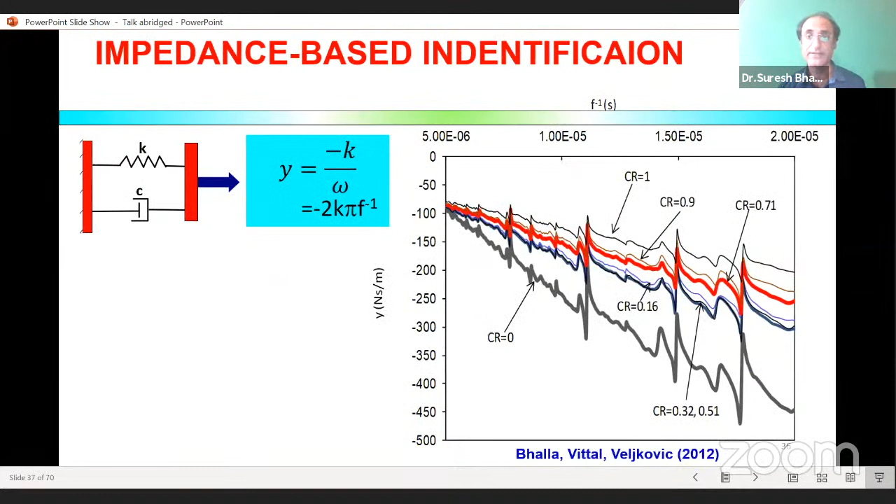In the case of steel components, the technique is very expedient. We can obtain the direct measure of stiffness, and this can be calibrated in the laboratory, and the model can be utilized in the field to obtain a measure of the remaining service life of the structure.

I'll just take a pause, an aeroplane is flying very low. Just give me 10 seconds.

This is very relevant for structural health monitoring and also for wireless networks, because IoT and wireless systems are making penetration in structural health monitoring technology. The idea of harnessing the vibration energy of the structure, especially bridges, is gaining ground, and we'll show you some real life applications. Essentially, when we say energy harvesting, we need a source of external energy, and that is abundant in the vibrations of the bridges.

Then we need an element which can convert that vibration into energy, and we have the piezo as the element. We have seen that it can be used as a generator. Then we need a conditioning circuit consisting of a rectifier and other circuit elements, followed by a storage unit, say a rechargeable battery, which can power the load in the form of sensors. Not only the sensors, it can also enable data processing and data transmission.

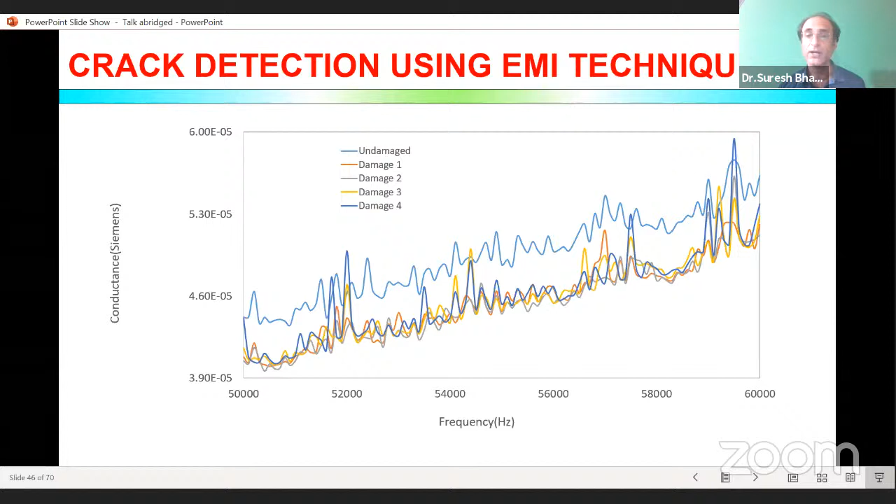Now we show some practical applications of these techniques. Here we show the monitoring by Professor Ramashankar, MNNIT Allahabad. He had been involved in the monitoring of the Naini Bridge, and he used the electromechanical impedance technique, EMI technique, in the bridge. Since global vibration techniques are insensitive to local cracks, he could well utilize the EMI technique with an array of sensors. He found that the signatures were more or less the same, but in one instance a group of sensors showed abnormally different signatures, which helped him pinpoint the occurrence of a crack that most other techniques, like strain measurement or global vibration techniques, would have missed.

Now we show you one real-life application of piezoelectric energy harvesting. This is a bridge just near IIT Delhi across the road. What you can see here is a cantilever aluminum beam, called a parasitic structure, which has a piezo sensor attached at the root. The idea is that when the bridge undergoes vibrations from vehicles, this beam vibrates, and dynamic strains develop in the piezo sensor, which can be used for energy harvesting.

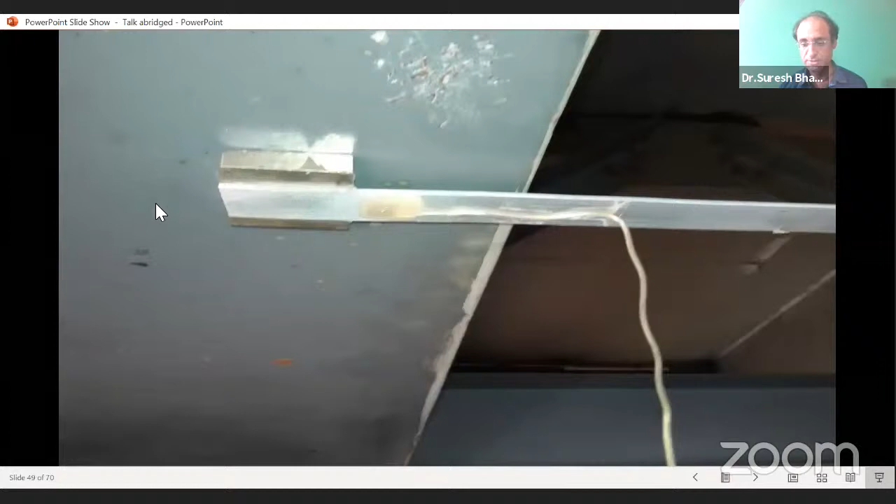We'll just show you the video. Here is the close-up picture. We used a magnet to temporarily mount this system on the underside, on the soffit of the girder. In addition, we also bonded some of the sensors directly.

These are some of the piezo sensors which we bonded directly on the underside, and it was a bit difficult. In some cases they broke, because for curing we need to press them, and we used a strong magnet that sometimes applied such high pressure that it cracked the piezo sensor. But we also used MFC, macrofiber composites, which are much more durable, though 100 times costlier compared to bare piezo patches. We have used both types of sensors.

And here is the bridge. I will just start a small video. Just bear with me.

Professor, I think we are not able to. Yeah, just bear with it and keep watching. Okay, the video. Okay.

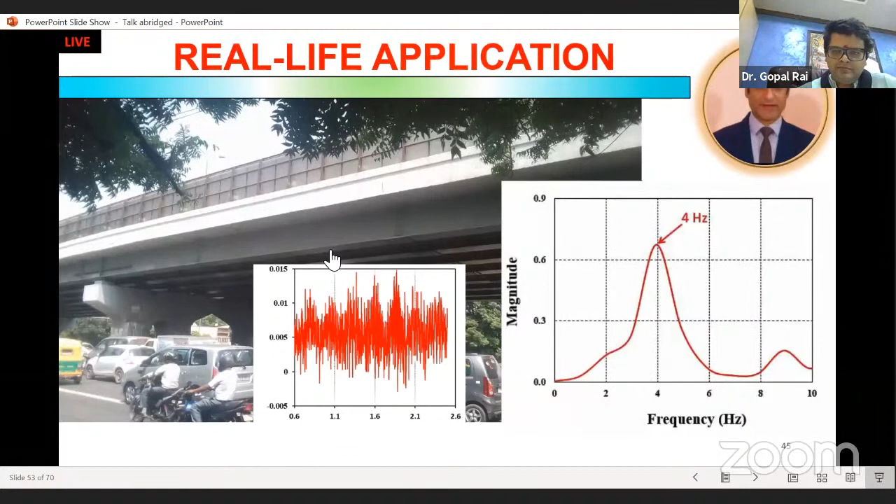Now you will see the cantilever vibrating under the loads of vehicles. Now just look carefully. Here we are charging the capacitor.

I hope the video ran, though I'm not sure about the sound, but the sound wasn't important. I hope you saw the cantilever bridge, the cantilever parasite beam vibrating aluminum, and then the charging of the capacitor. In the recent experiment in December, we were lucky to do it just before the lockdown.

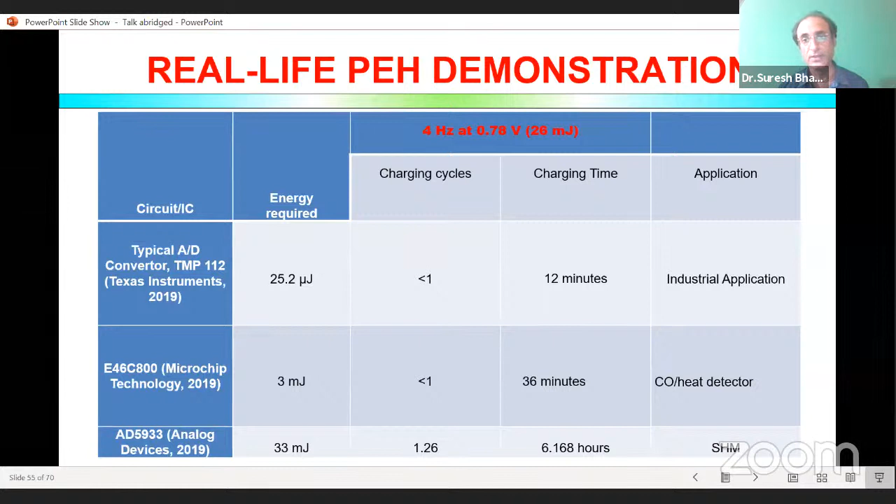So we could also charge a rechargeable battery. This is the summary of results: we could get power from the directly bonded piezo patches in the microwatt range, and in the case of the secondary structure, the aluminum beam, we could get power in the milliwatt range. This power is enough to enable structural health monitoring. We checked with a number of commercial sensors and found this provides enough charging so that we can run these sensors periodically.

Of course, these techniques also have potential applications in corrosion detection. The electromechanical impedance technique, in the laboratory model, we have shown is quite good in identifying the corrosion stage.

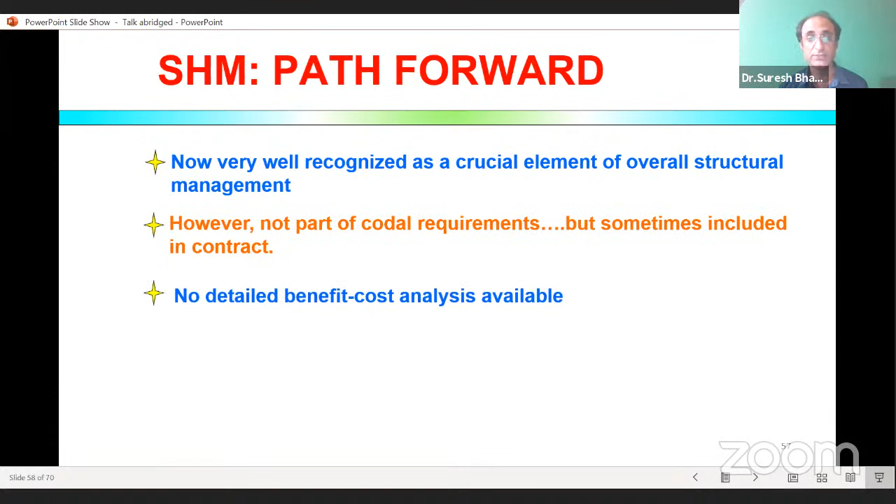Now, coming to the end of structural health monitoring, what is the path forward? Structural health monitoring is now very well recognized as a crucial element, and it's not yet part of the codal requirements. Clients are often not fully aware of its benefits, and there's no means of certification. Above all, there are n number of technologies, and the obsolescence rate is also very high, which causes confusion to the clients.

But if we see the Indian context, we can note some success drivers. Basically, structural health monitoring techniques which are not heavily dependent on modeling have a brighter future compared to others. Techniques requiring minimal or no baseline data will have an edge. In the case of sensors, those which are usable, rugged, low cost, and have long life will certainly take the top position.

Technologies with cloud and IoT linkage will see self-powered sensors rise to the top, along with integration of machine learning and AI.

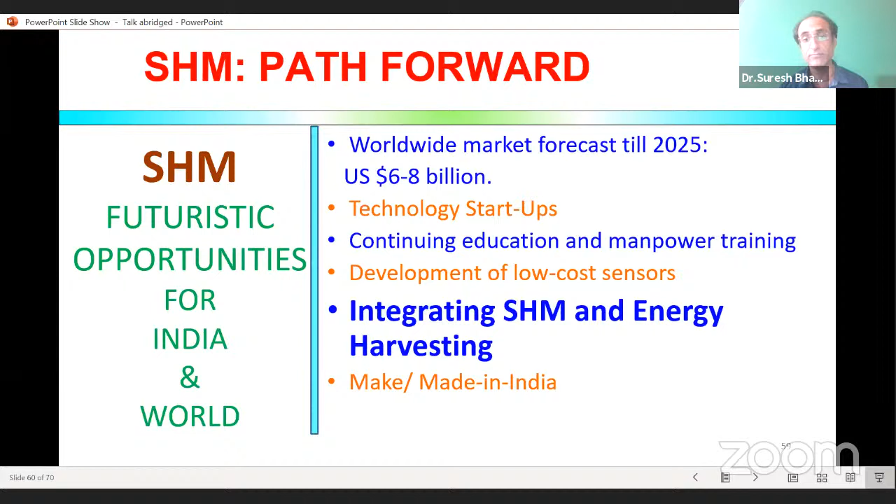The path forward is that the worldwide market for structural health monitoring is bound to grow to at least 6 to 8 billion US dollars. This necessitates continuing education and manpower training so engineers have basic knowledge of structural health monitoring sensors and techniques. It also calls for development of low-cost sensors and similar systems, integration of structural health monitoring and energy harvesting, and finally, make in India and made in India.

This also provides opportunities aligned with our government's emphasis on being vocal for local. In the case of India, we need trained engineers, industry-academic joint research, an ecosystem for academicians, startups, and industry, and we also need something at the policy level.

These are the stages through which technologies pass. In the era of Thomas Alva Edison, a single person could invent so many things. Now, one person cannot invent any single system, sensor, or device. It has to be teamwork of multidisciplinary people.

So, coming to the end, we need very close tie-up between academia and industry. We need more R&D projects from industry. We can sort out industry-driven MTech and PhD projects. We also need speedy invention disclosures, speedy starting of startups and their encouragement, and technology transfers.

You are also most welcome and invited to our virtual lab. There are 100 plus virtual labs right now, and Smart Structures and Dynamics Lab is one of them. You can try these experiments. There are two types: trigger based and simulation based. Right now, simulation based experiments are working, so students who are part of this workshop can definitely take part.

Here are the references. Again, I thank you very much. You can follow us on our Facebook pages, SSDL and Futuristic Technologies.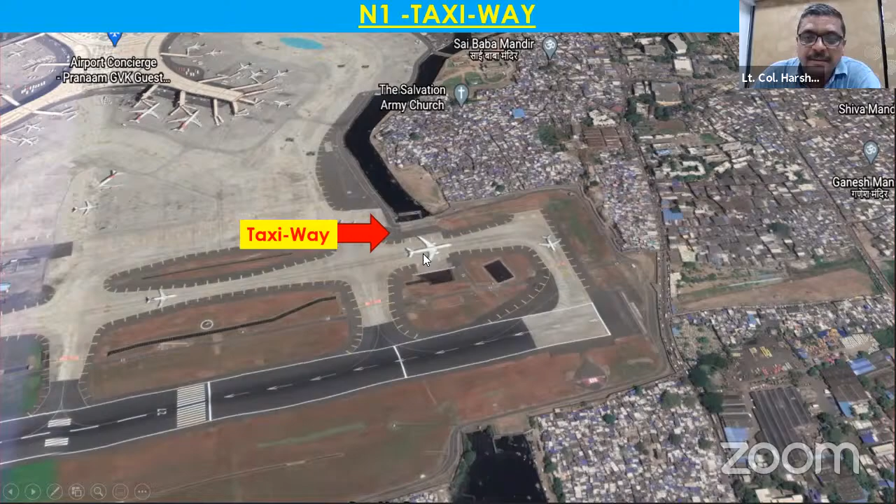The agencies involved in the project were MIAL, GVK was the lead contractor, Larsen and Toubro was the executing agency, 21st SHM, part of DGC, was carrying out the structural instrumentation, and Tandon Consultants were the designers as well as checking the parameters for the bridges.

A little bit about the bridge: the bridge across the Mithi River was built way back by the Airport Authority of India. The overall width of the bridge was 120 meters, and it comprises 5 parts.

The central part was the carriageway, basically the main taxiway. Adjacent to them were the shoulders, and thereafter the serviceways. You can see there are 4 expansion joints, while in the drawing it shows the old taxiway and old alignment of the runway. The substructure comprised of RCC abutment walls and

RCC wall-type piers along this line. There were box girders - 60 box girders in total - which were divided into compartments by diaphragm beams over the piers.

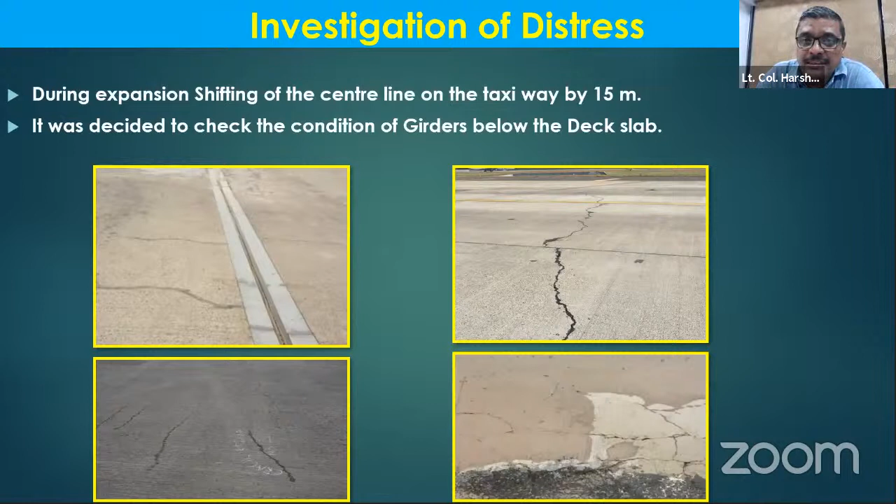Therefore, it was decided to check whether there are distresses in the girders below. This was the drawing approved by the consultant to have the investigation done for the girders below.

In the initial phase, it was decided that a conditional survey be carried out near this expansion joint through the openings which were available on the top.

As we had to work in confined spaces, special safety measures were required, like special clothing, helmets, and portable oxygen cylinders, because the air inside was doubtful. Torches were required as no other light was there. Walkie-talkie relay systems were installed.

Anything happening to a person carrying out the conditional survey of the girder had to be addressed by pulling them out through this opening only, after crossing the entire stretch. So emergency measures for evacuation were ensured with safety ropes, an ambulance inside, and a doctor on call.

Before starting the conditional survey, fumigation through the open chambers was carried out so that there were no insects or such things over there. When we carried out the conditional survey of the box, we realized that all the tubes were filled with water and muddy water.

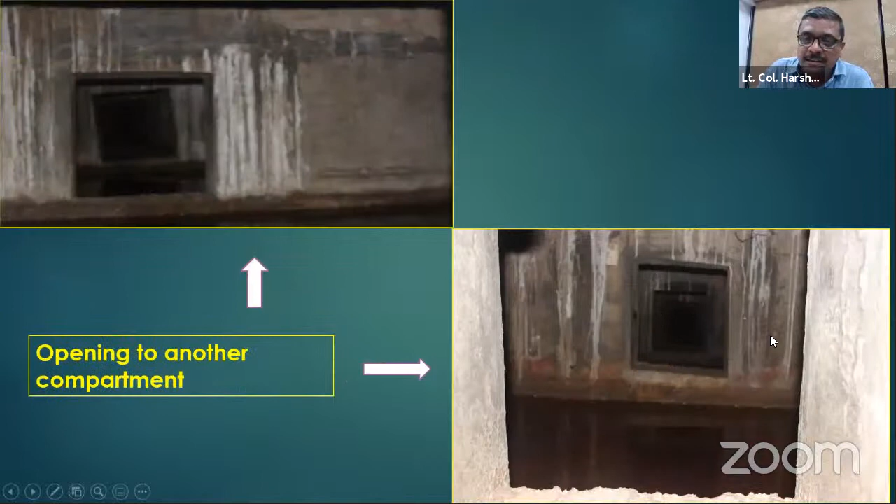These were the openings I was talking of, to access the other adjacent tubes. Now you can see all the mud. Over the period, the water became all muddy, and the environmental condition for the structure over there was severe.

The survey was carried out using torchlights, and electric halogen lamps were restricted to dry surfaces only. Structural distress cracks were observed, recorded, and noted. It was observed that the deck slab had cracked, and water was leaking through it. Crack width was recorded by a crack meter, and depth was also recorded.

Incidentally, this crack meter was given to me by engineer Gupta Sahab of Tandon Consultants, and I have preserved it till date as a souvenir.

Now, after the distresses were seen in the girders, deliberation was made as to what to do, whether to go about getting the complete bridge rehabilitation done. Then it was decided against, because that was very costly and was going to consume a lot of time.

So it was decided that we would do the conditional survey for all the girders and carry out NDT, and thereafter carry out structural health monitoring by establishing LVDT and strain gauges, acquiring data with a live aircraft load, so designers could check whether the parameters were in range or not. Thereafter, arriving at the percentile deficiency or strengthening required, and the best and economic repair method. All this was required to be done in 30 days.

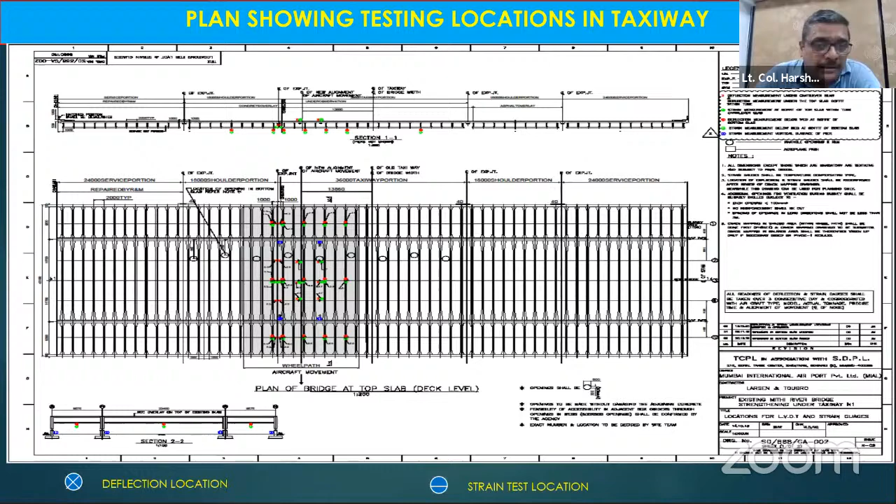The area for carrying out the structural health monitoring was restricted to the new carriageway, main carriageway, and around 62 LVDTs and strain gauge points were identified by the consultants where recordings were to be carried out. Now Sahil will take you further till data acquisition, how he went about mobilizing the site and acquiring the data.

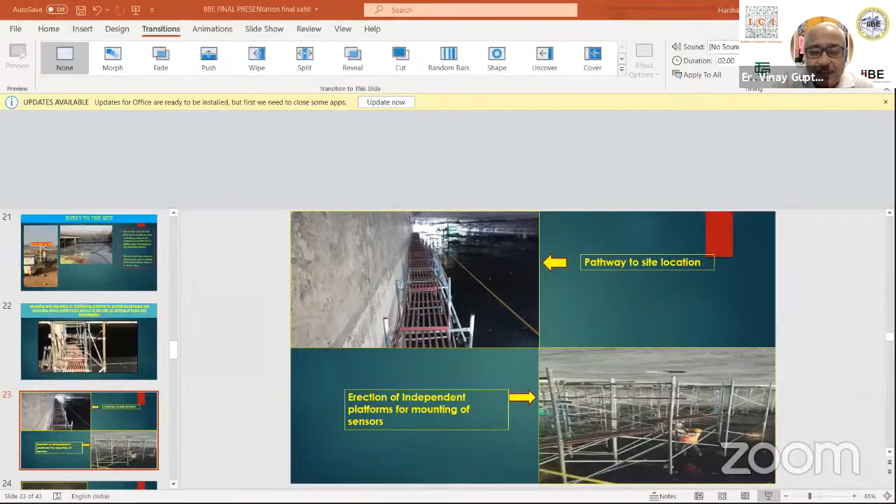Everybody knows working at an airport is so very difficult that it makes your life miserable. The reason is every minute at the runway has a cost. Aircrafts are doing a minute to minute job, no time is wasted because you don't have very many extra runways. So they went to the extent, since we were involved in this project, of telling the airlines: in the midnight, give us some time, we will fly at that time. But the time you give us to fly, we don't want to utilize the entire time for only getting the aircraft and then flying. We'll keep the aircraft ready. We will tow the aircraft through a trailer or tractor which pulls it, bring the aircraft there, and then just fly as soon as you give us the time, because there's a block time which is over, we'll start flying. So every minute they have to save. In those conditions, these people worked when 30 days was the period given for the huge job of repair.

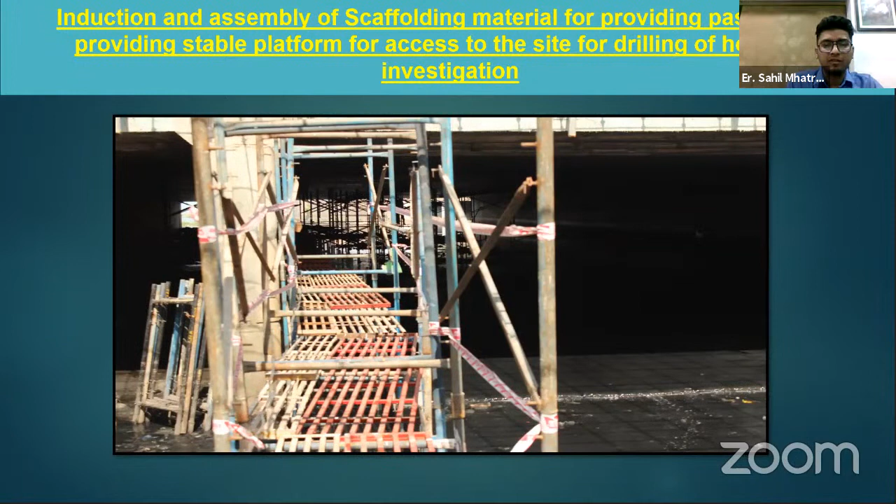On the left hand side, you can see the pathway to the site location, and at the bottom of this screen, you can see we had erected independent platforms for mounting of sensors. The same platforms were erected in all the three bays, so that we can mount the sensors easily.

As mentioned, we had to drill octagonal holes below the slab. This was the initial stage, and this was the final stage where the octagonal shape holes were drilled, and all the instruments were transferred through this hole, along with individuals carrying oxygen cylinders who used to go inside. They used to place halogens at the dry platforms, and then we used to mount sensors.

Also, as required, the non-destructive testing of the girders was carried out. The rebound hammer test was carried out to find the hardness of the concrete, and we had used UPV to find the integrity of the concrete.

Now the main part of this whole condition assessment was to record the deflection as well as the strain values. The parameters for deflection and strain in the concrete were to be obtained, for which we had placed around 62 sensors - 62 LVDTs and 62 strain gauges - all across the three bays.

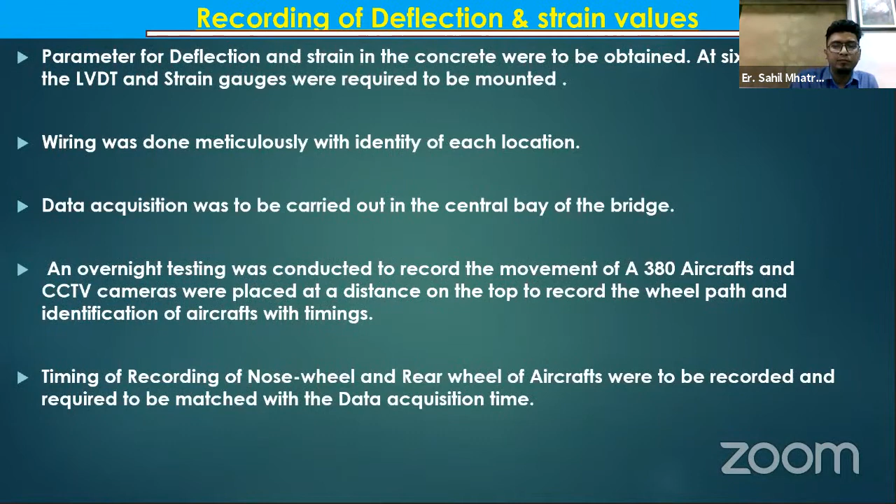These were the sensors which were used for the instrumentation of the bridge - the strain gauges and the ELAP linear potentiometer. The strain gauges of 60 mm length and resistance of 120 ohms, and the ELAP potentiometer with the least count of 0.01 mm.

As we used LVDT, it is basically used to measure the linear displacement. So by mounting our sensors below the bridge, we calculated the linear displacement. But as it is a non-electrical quantity, it is then converted into electrical quantity via output voltage.

It basically has two types of windings - the primary winding in the center, and at the corners, two secondary windings. It is called differential because it calculates the voltage difference between the two secondary windings. The primary winding is excited by an alternating current source, which produces an electromagnetic field that also induces currents in the secondary windings.

For data acquisition, we used a National Instruments cDAQ-9178. In this cDAQ, there are 8 slots where we can find the deflections, monitor the strain, and find the natural frequency of the bridge.

As you can see over here, these are the linear potentiometers which were mounted below the girders. In the center one, it was mounted above the scaffolding, and huge stands were made. You can also see the wire mesh.

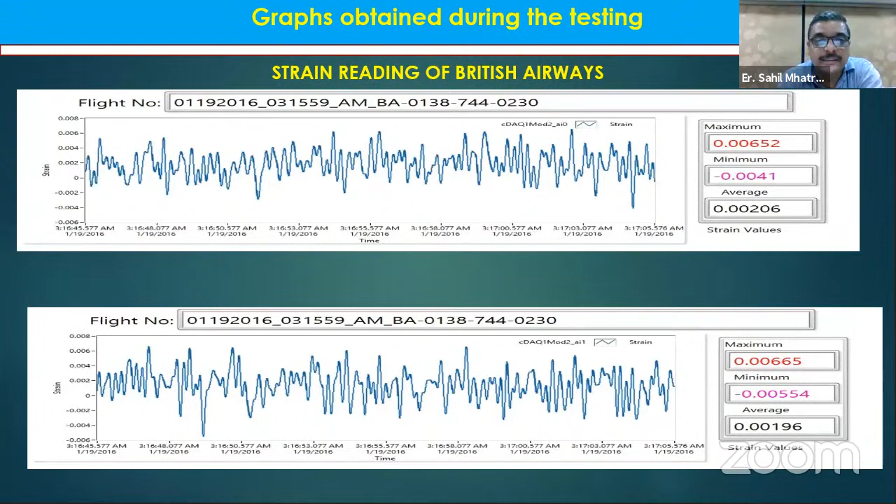These were the readings obtained through one of the NI systems we used. You can see the timings and date over here, showing when the data was acquired.

Similarly, with the second NI system which we employed, we also captured the complete good signals, and practically their readings were at an accuracy of 2.6 mm. So with that level of accuracy, we acquired the data in such tough situations.

These are some of the views. The top recording was going on with date and timing, such that the data collected down below could be correlated with the aircraft. The aircraft loading was given by the Airport Authority of India to the consultants who had analyzed the bridge, so that the bridge parameters could be ascertained.

This was the rear nose wheel path and rear wheel path which was there. Based on the results obtained through the structural health monitoring, the consultants decided that the parameters were in range, and therefore recommended that instead of a major rehabilitation work which they were earlier contemplating, only crack filling with low viscosity grout and strengthening of the expansion joint, or the cantilever portion of the expansion joint by introducing additional lugs for shear deficiency, was needed. This complete exercise resulted in a lot of savings.

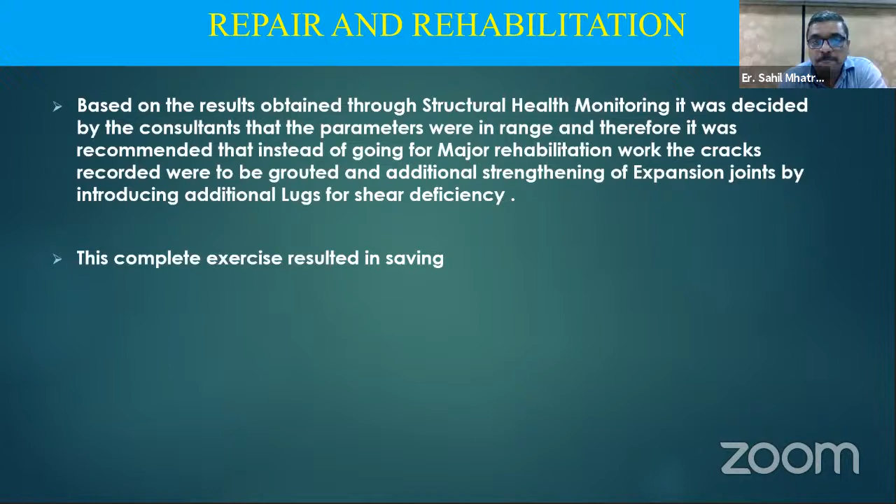Now, challenges at site: as Engineer Gupta sir was saying, Mumbai airport handles around 900 to 1,000 flights - at that point of time, not as of today in this COVID situation, but at that point it was handling 900 to 1,000 flights per day. Practically, a flight takes off or lands at the rate of every 1.5 minutes.

Whoever has taken a flight from Mumbai would have experienced an extensive waiting period before takeoff of the aircraft, and this is exactly where the N1 taxiway and our bridge site was. So whenever an aircraft is on the taxiway, the norm is you cannot cross it. So it practically used to happen that we would go for work early in the morning at 8 o'clock, and after clearing all the security drills, we used to land up at the site in the afternoon.

But still, with all these, as Sahil brought out, Mithi River, and the labor, after getting his background check, police check, and medical done, we used to get him on the site, and next day he wouldn't turn up. After going through all that and seeing the site conditions, he never used to turn up for work. Therefore, advanced planning was required.